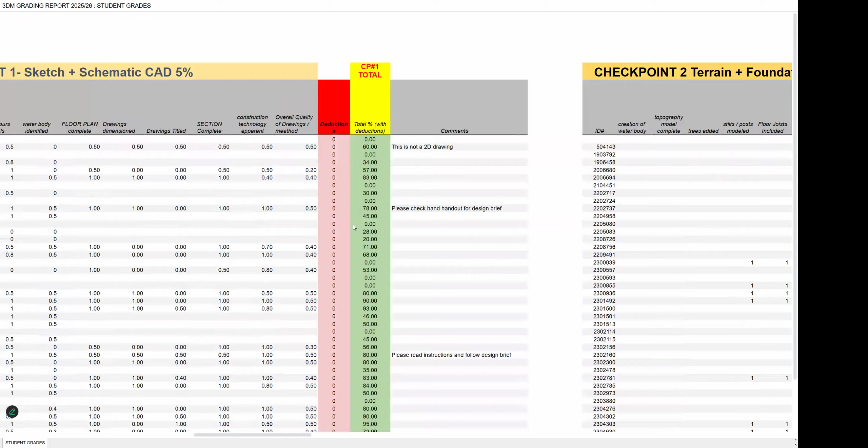By the way, don't forget, guys, that you can at any time go ahead and check your grades. 3D modeling. Right, you just go to the check grades section on the website and you just scroll over until you reach the different checkpoints. Please pay attention. Sometimes I leave some comments for the different checkpoints. If I don't leave a comment, it doesn't mean that your work is not good. But usually I leave a comment, especially when there's an error with your drawing, or you need to resubmit or something like that.

Sometimes I will leave specific comments. Second here. Right. So please don't forget to check your comments whenever you check your grades, right? So let me see what the latest is here.

Excuse me, good morning, sir. Yeah, man, morning. Did you get to check on my name? My ID number was missing. You still seeing it missing? Yes, sir. Okay. All right. Let me see here. There was a couple. Yeah. So it was fixed. So let's give it a little while and it should come on, because when I check it here, let's see. No. Hold on a second.

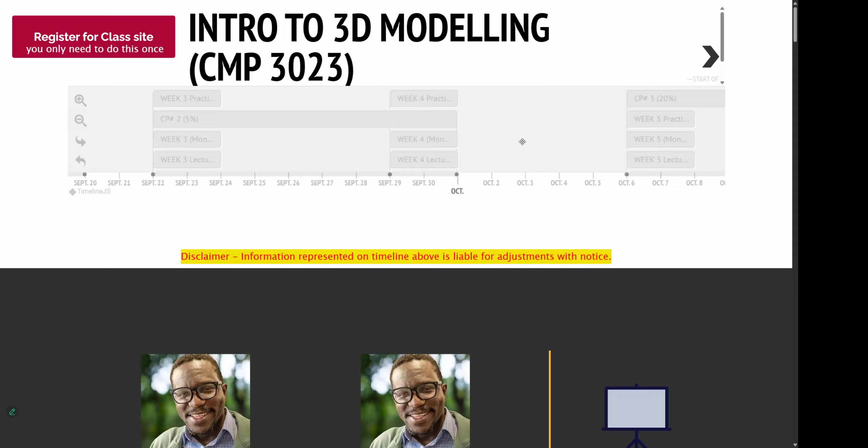All right, guys. So what we're going to do today is... you should have your foundations in Revit, at least for those of you that submitted. I see some other person submitted after I marked. That's fine. You do have up until Wednesday to finish submitting all of checkpoint 2, right? So this should update in a bit. Right, so you do have until Wednesday to submit for checkpoint 2, which is going to be October 1st.

So just to keep track of where we are, so far, you guys submitted checkpoint 1, which was the designing of your lookout tower. We started in Sketch, and then you did a line drawing that had more dimensions. And then last week, we built the foundation, right? So now we need to put the foundation on the terrain, right?

Before we do that, what I want us to do is a little class activity for today, right? As you know the deal, class activity is going to pop up randomly throughout the module. If you participate in the class activity, then you get the points. I did promise you guys double points last week, right? If you submitted the terrain on the same day, you get points towards your class activity. Did I do that? I think I did. All right, guys?

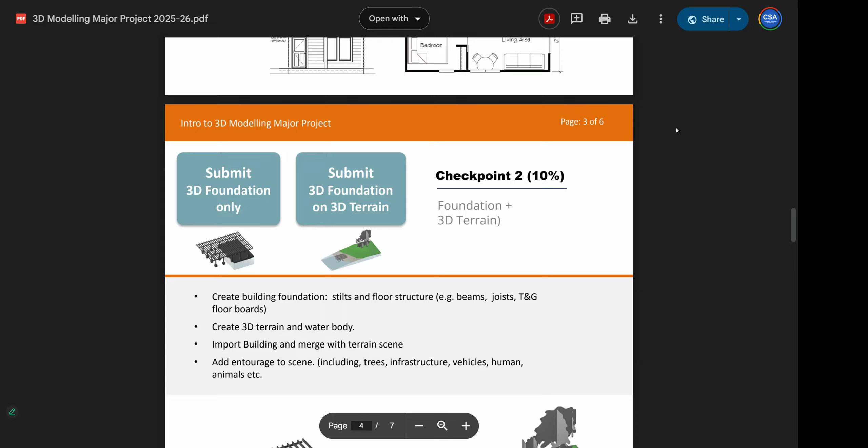Yes, sir. Okay, good. So for those of you that submitted the terrain in class, on the day last week, you will get points towards your class activity. You can check your class activity progress on the website. You scroll down, use the class activity. So activity 2 is going to be the terrain, and you will see that updating a little bit. Activity 3 is what we're going to do today, and it's kind of cool.

So what we're going to do is make an object to put on our deck, right? I'm going to open where I am in the model. So remember the deal, guys. As long as you are traveling with me, you should be fine, right? When I say traveling with me, meaning if you are where I am in the model, then you should be fine in terms of completing the major project, all right? And where I am is working on the foundation.

All right, here we go. So from here, let's go to libraries. Hold on, I'm just looking for my files. Come on, computer, faster, faster, faster. Okay.

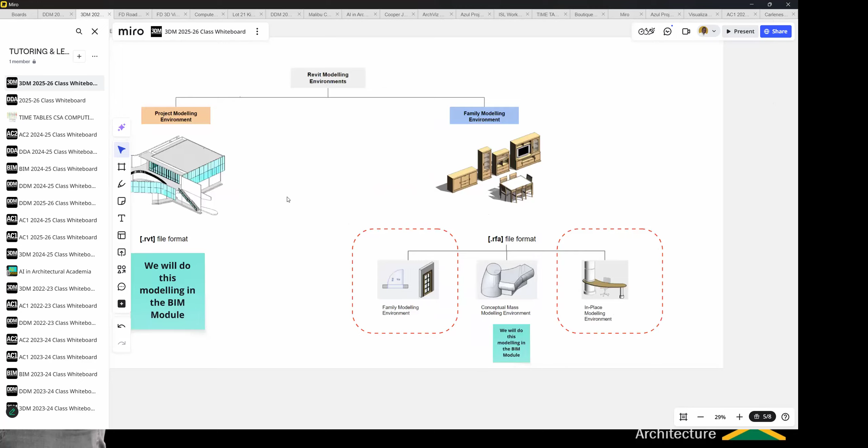Revit has two modeling environments, right? So when you open Revit afresh, so for example, this is Revit here now, and let me close these other projects here. Right, when you open Revit, it looks like this, where you can see all your work that you worked on, and then you see down here, you notice this family section, right? So the way that Revit imports objects into your project is through the family editor, right?

So in the family modeling environment, that file is called a RFA file. Has anybody ever come into contact with this file before? I think we know RVT. Anybody? Yes, RFA? Right, because you probably go on the internet and you download a lot of models. So for example, there's a ton of websites out there.

Here. So, and we're gonna actually visit one of these sites maybe a little later. For example, this one that has Revit content. This one is called BIMsmith. It has different categories. So for example, you can look at doors, and then it has all of these door families here that you can download. It has furnitures and all sorts of stuff. We're going to look at that a little later, but what if you want to make your own object? So that is what we're going to look at today in our class activity.

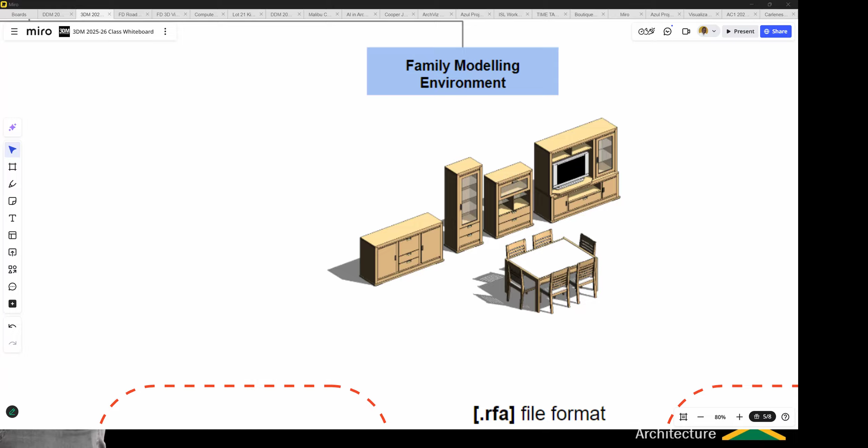Now, we're not going to build something overly complex. We're going to just investigate the family editor just so you guys understand how it works, and we're going to put an object in our model. So I want you guys to just follow along, right? It's really simple, and we're not going to dive too deep in the family editor. We're just going to kind of swim on the surface a little.

All right. So the family editor, when you're in Revit's family modeling environment, it takes on 3 modes. You have one that's called in-place modeling. You have one that's called conceptual mass. And then we have one that's called the family modeling environment. So these are the 3 ways that you can insert objects into your Revit model.

Now, the conceptual mass, we're going to use that next semester when we're doing BIM. We're going to use the family modeling environment today. The in-place modeling, we might touch that in another class activity. We'll see how that goes. But the family modeling environment, guys, is super important for you to at least have an idea of how it works. So I want you guys to just fire up Revit.

And what we're going to do is we're going to create this very simple bench. I've placed it all the way over here. And oops, let me just drag it over here. So this is on the Miro board. If you jump on the Miro board, you can get it real quickly.

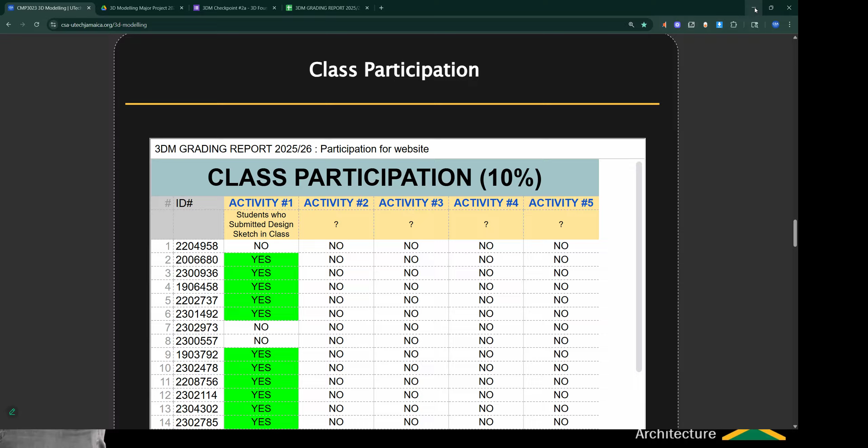There we go. I'm going to minimize you. There we go. Come on. Here. Okay, Revit, where did you go? Where did you go? There. Okay. There we go. All right.

So when you get to your title screen here, normally when you open Revit, you would go to new project, which is what we did last time. But this time you're going to go to new family. So under families, you click new. Then you're going to get this window, and this is an important window. What it's asking you is, what type of family do you want to create?

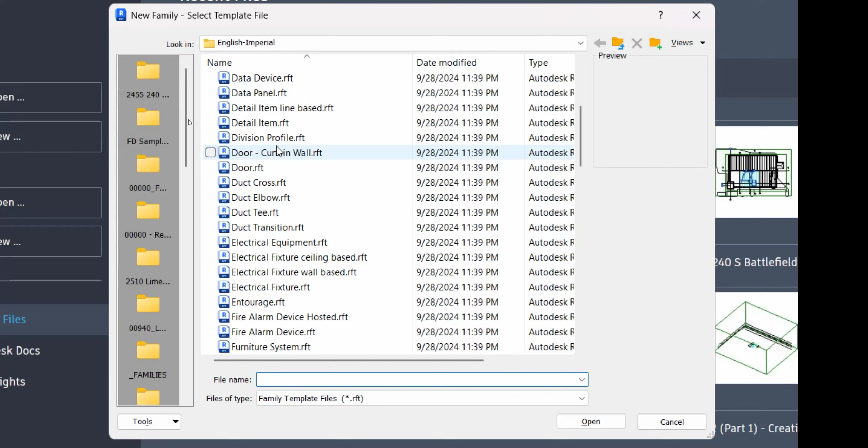Remember, families are the way Revit imports objects into your project. This time around, we're creating a family from scratch, which is different than when we download it from Revit City or wherever. So when you choose new family template, you get these options, the different types of family you can create in Revit, everything from door to fire alarm. Of course, we're looking for the furniture template, and we choose open. All right, so this is what it looks like.

When you open the family editor for any one of those templates, it's going to look something like this, and you will see these crosshairs in the middle of your screen. When you click on the crosshair, you will notice a little pin here, which means it is pinned so you don't move them. This crosshair represents the center of your scene. We're going to leave that intact.

Now, where are you? Here we go. So our idea is that we want to make this bench, and because it is a type of furniture, that's why we're in the furniture category. You might be wondering, okay, but what if I wanted to create furniture and I create it in a door category?

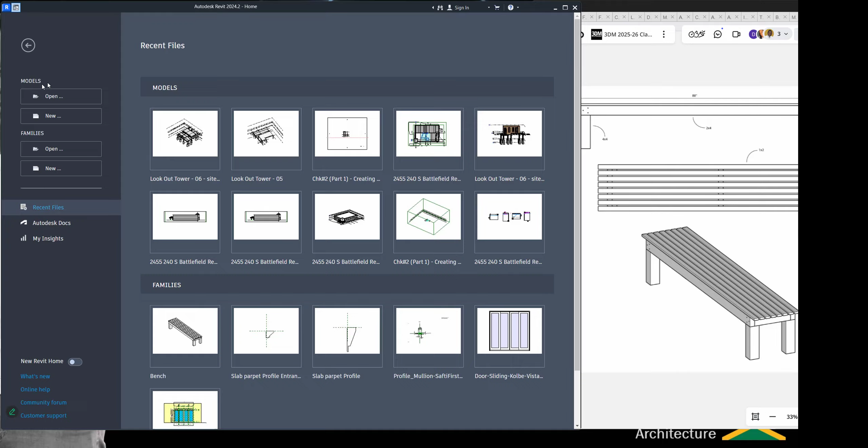So we're to open a new file? No. Well, okay. What I did so far is that I went to families and I chose new. Oh, families. Oh, right. So it's not a project, right? So you see models and you see families. All along we've been creating a BIM model. That is what we're working in to create our tower project, right? But this time around, we're going to be creating a new family. So when you go new family, you have to choose a template.

Right. So this is my project and how far I've reached in my project. Notice when you're in the project part of Revit, up here it has architecture, structure, steel, all of this stuff. This is what it looks like in the project environment. However, when you're in a family environment, notice that it's different. You see create, insert, annotate, like you get this new tab called create. So as I said, it's almost like you're using a different program per se.

So one of the first things we're going to do is establish just the boundaries for the object we created. And usually that's where you start first whenever you're modeling anything in Revit from scratch, right? So I can see that this bench is 88 inches long and 20 inches wide. And in your family editor, one of the most important tools that you're going to be using is called a reference plane. Now, there are reference planes in the project part of Revit, but we don't use it that much.

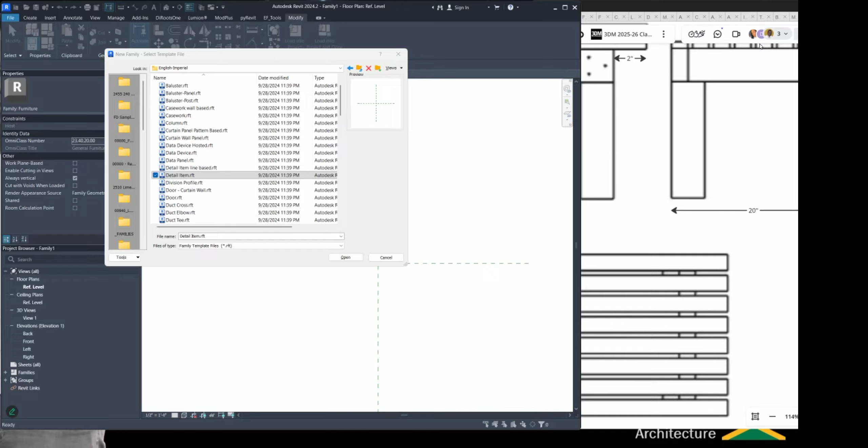Got you. It's like Kristen said, she could model this bench in 5 minutes in SketchUp. But when you import the SketchUp into Revit, Revit can't identify this thing that you imported. It doesn't have a category, and because it doesn't have a category, it doesn't have a way that it can apply line weight and shades and overrides and all the features that Revit has. It wouldn't be able to apply it to this bench that you import from a different software. This is one of the reasons why we would create the object in Revit itself.

All right, so the first thing we're going to do when we open Revit is just to kind of create an outline of where the bench will be in plan, right? So we're going to go to Create. Before we start to extrude or model anything, we just want to have some guidelines, some reference lines. Hence the term reference plane, right? So make sure you use reference plane or reference line, don't get them mixed up, right?

All right, so I'm going to use reference line, and I'm just going to draw a line randomly, draw one randomly like this. I'm not putting any measurements to it. I'm just drawing 4 lines like this. And from a top view, this would represent where my bench is going to go. Now, in Revit, whenever you're creating stuff, you want to just draw the rough thing first, and then you modify it to what you want, rather than trying to draw it exact.

So notice that the idea is that if I look at my bench in a top view, it would land somewhere like this, and see the pieces of wood there on top. So these reference planes are just representing the boundaries of that bench. Now, obviously, I need to change the dimension of them. So what I'll do now is I'll click on one of the reference lines, and I know already that the bench is 20 inches wide. So I can just drag this till this says 20 inches.

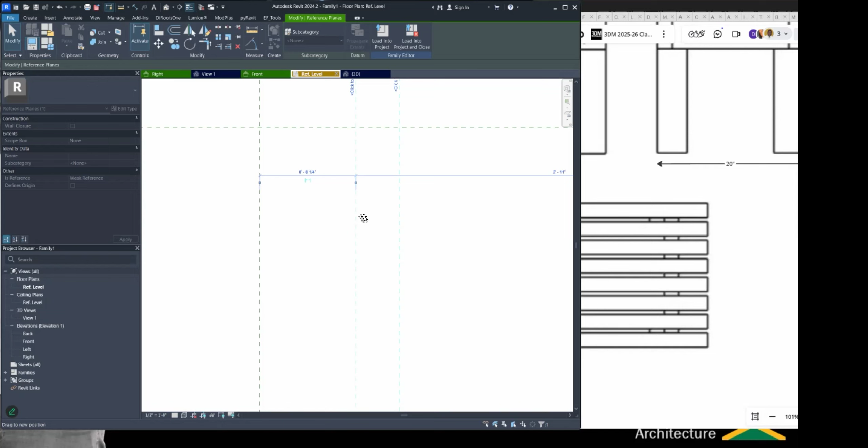Or I could just click in there and type 20 inches. There we go. So that's 20 inches. Actually, it wasn't far off. The length of the bench is supposed to be 88 inches. So I'm going to just click in here and go 88 inches. Now, notice how this works. If I have this line selected and then I change the dimension, then this line will move. If I have this line selected and change a dimension, then this line will move. That's just the way Revit works.

So I'm just going to extend these lines down. All right. And those lines we find where? What we just drew? These are under Create. They're called reference lines. Reference line, okay. All right. So this represents the outer parts of our bench.

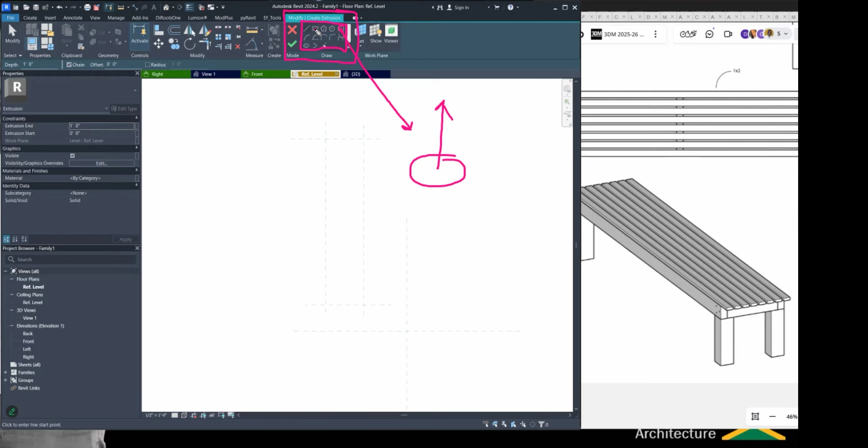So these shapes are basically saying, remember you're inside the sketching tool set, that if I use a circle and I draw a circle, then it's going to extrude it upwards. If I use a square and I draw a square, it's going to extrude it upwards, and so forth. So all of these sketch tools are asking you to draw the profile of what you want to extrude.

All right. So what we're going to do is we're going to go to the rectangle tool, and we know from our diagram here that this is a 4x4, 4" by 4". So I'm going to start at this corner and I'm going to draw a 4x4 box. Now I can actually just change this until it reaches 4 on this side and 4 on that side, right?

Or sorry, what is the width of the bench again? The width, remember it is on the Miro board, okay? But just so you know, it's 20 inches. Okay. So this is 4" by 4", and I'm going to click once. So this is my sketch. Now notice that I'm still in sketch mode, and you see this big X and this tick here. So Revit is asking, do you want to confirm this or do you want to cancel it?

Now, if you look on this side over here, these are the options when you are in extrude mode. It's asking you how high you want this to extrude. The default is 1 foot. Now, you can see that here is the height that we want, which is 18. And then this is a 2x4, right? So we're going to take the 4 from the 18. So we know that this should go up 14 inches. That is how much our extrusion should be.

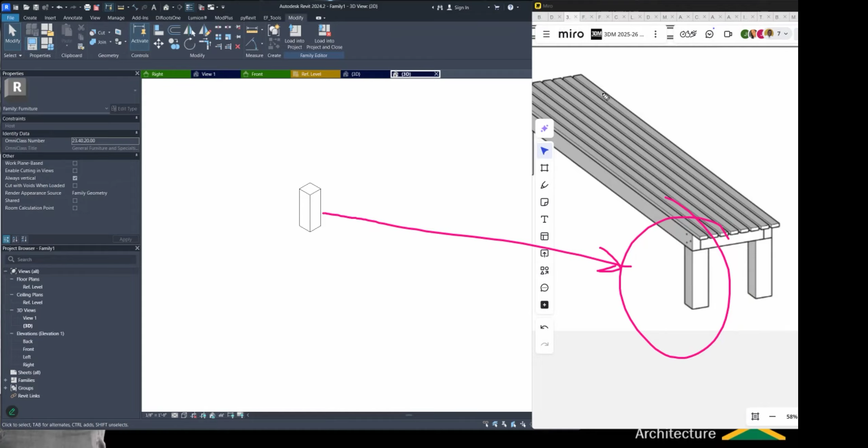All right, now notice when you're in 3D view, you don't get the reference lines, right? And what I want us to do is put the plan view side by side. The way you do this, you just drag this out. Let's put it on this side. Hopefully we have enough space for that.

So on the left hand side here, I have a 3D view, and on the right hand side, I have my plan view. If I click on this object in plan view, notice that you see it in 3D view, so you're able to keep track of what you're doing. So I want you guys to try and arrange your window this way, with the plan here and the 3D view here. As I said, notice that you don't see your reference planes in 3D; they're there only in 2D.

All right, so all I need to do now is copy these a few times. We all know this already because we've used the copy command. The shortcut is CO, right? And we're going to copy it here.

And we're going to select these two guys and we're going to copy it up here. All right. Sir, what did you do to get the box again? It's under create. So I go to create and I use the extrude tool. Okay. All right. Okay, thank you.

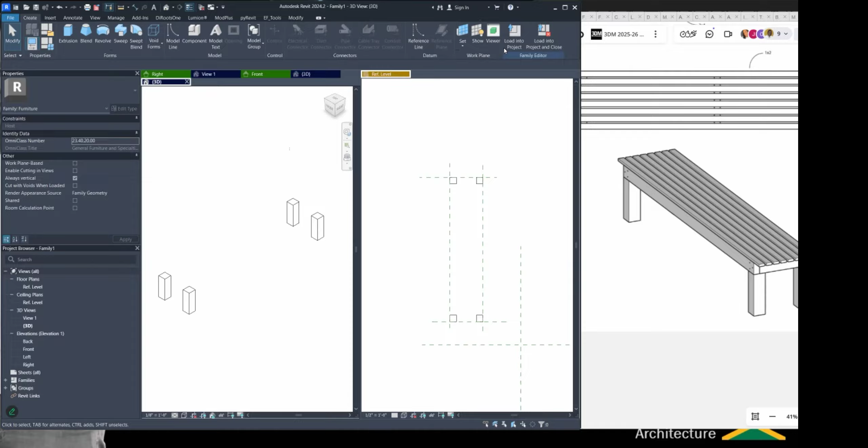So for example, to access your work plane, it's on the right here. If you're under the create menu, it's right here where it says work plane. So if I say show my work plane, notice you see this blue line here. So what this is saying is that anything I draw is based on this work plane. So for example, if I go to my extrude and I choose to draw a circle, the circle is going to be on this work plane, which means that it's going to extrude up. So if I wanted something to extrude this way, I would have to change my work plane like this.

So by default, Revit has work planes that are working in the background. I'm going to cancel that extrude. And usually it's off by default, but you can show it. So the idea is that I would want to draw a shape like that and extrude it that way. Right, and I would want to extrude it that way. But in order to do that, my work plane has to be like this.

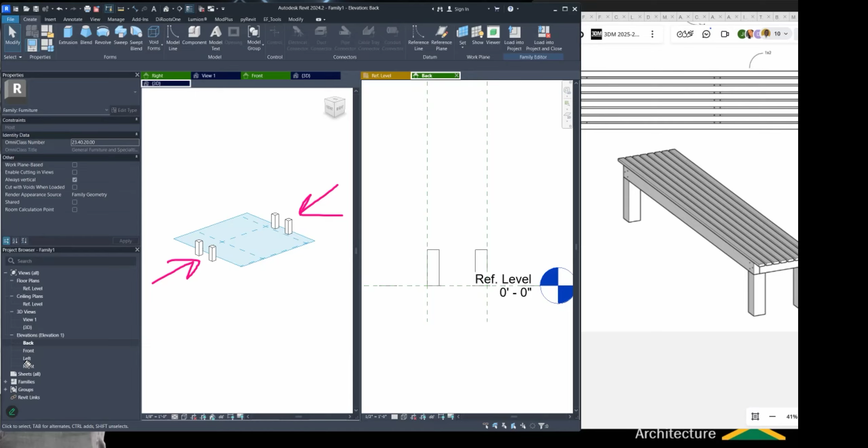All right, so if I go to a front view, notice it looks the same way. And if I go to a left or a right view, notice that it looks that way. Now, I'm going to go to my 3D view on this side. Oops, no, that's the wrong project. 3D view on this side. Right. So what you notice is that when I go to my side view, I'm seeing those reference planes. So let me go to top view and side view, because this point is important.

All right, guys. So notice these 4 reference planes that I have here. 1, 2, 3, 4. And from a plan view, I can see them. From a front view, I can see them because this reference plane here is this line here. Is it? Let me make sure. No, it's actually the other one. Right. So this reference plane is this line here.

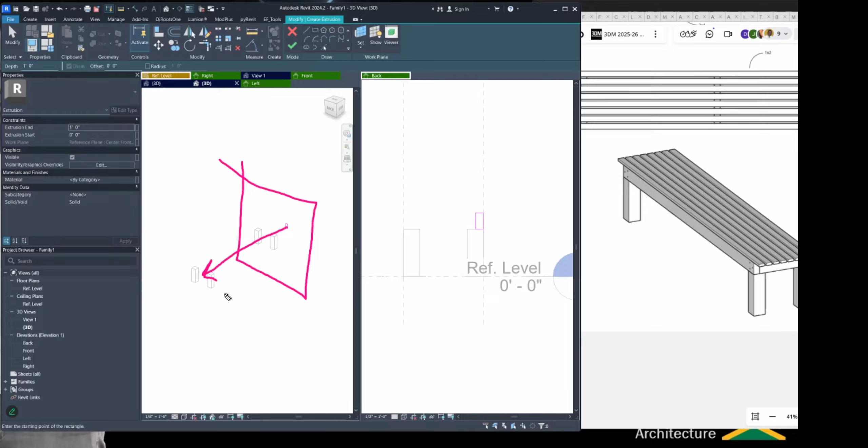Now, the reason, remember, if I'm in a back view that's here, let me go to my 3D view. Notice that because I'm drawing this in my back view, automatically that has created a working plane for me like this. So when I extrude, I will go this way. But if I tried to create this from a plan view, it would have gone up. So that means you need to change your view in order to have your work plane adjusted to determine where you're going to extrude from.

All right, cool. So again, it's going to ask me what is my extrusion length. It says 1 foot by default. This time I know that it's going to be maybe less than 88 inches, but I'm not going to worry about that length yet. I'm just going to tick yes. And the reason for that is that I can adjust these easily in the 3D view, right? I don't have to go into the extrude tool to extrude. I can just grab these handles and change it, which is very handy.

So before I place this member here, I'm going to go back to my plan view, right? So my reference level. And I actually need to make an edit here because even though this is 88 inches, the legs actually come in 2 inches. So what I'm going to do is I'm going to move this. Now, I'm going to create another reference line. So I'm going to copy this, CO, and I'm going to copy this 2 inches. And I'm going to copy this 2 inches.

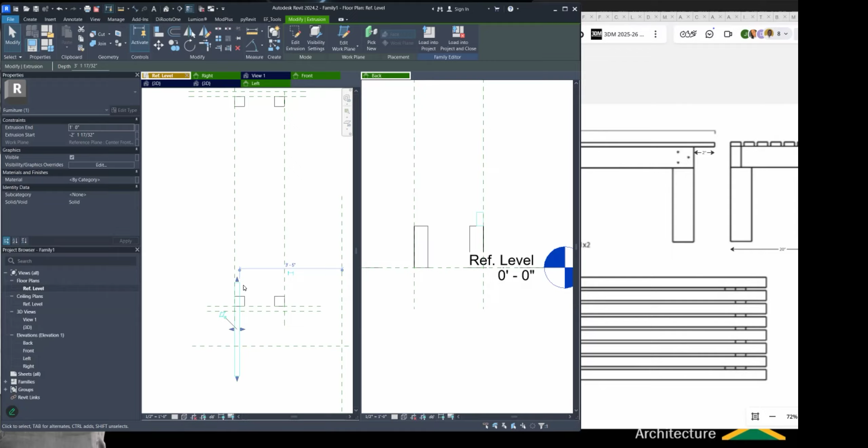I'm going to use the trim extend tool, because that's like the greatest tool ever. So you just click on that, click where you want the thing to extend to, and then click the place that you want to extend. Oh, hold on, do this right again. How is it the other way? I can't do it from this view. Oh, I can't do it from plan. Okay, well that's fine. Just extend it that way and extend it this way.

Oh, sorry, not trim extend, align. I want to use the align tool, which is this one here. Shortcut is AL. Right. So I just click where I want to align it from. And then I click the face that I want to align. Do the same thing here and click this face. So that way I don't have to be dragging. So the align tool is pretty cool with that. It's not the trim and extend. Even though the trim and extend does a similar thing, trim and extend would only work with a line or wall. It wouldn't work with an extrude.

All right, so I have this first point here. So if I look at this in 3D, this is what it looks like. So all I need to do now is I just need to copy this on this side. So I can actually do this in 3D view. I can go CO, copy. No, let's do it from elevation view. Copy from here to there.

All right, cool. Now next I need to get the member that goes across like this. Actually, this stops along here, so this should come down to this point. Right, so I'll use the align tool again, which shortcut is AL, and I'll just align those. So I click this face, click that face, click this face, click that face. Right, that is how it should be.

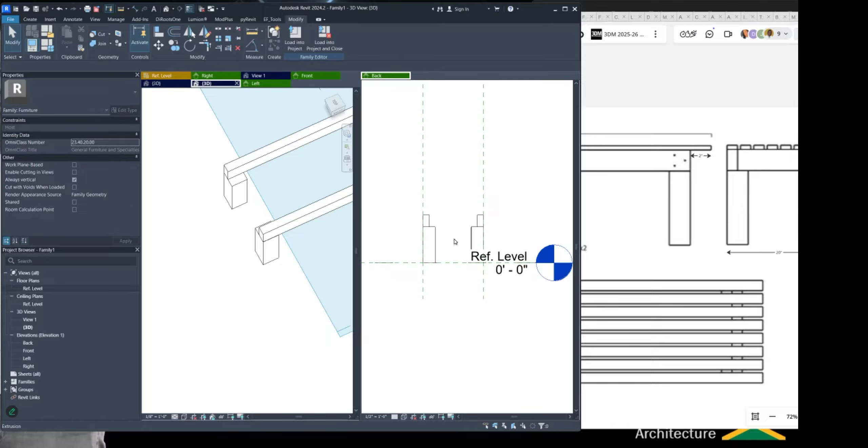So hold on. This is actually slightly off when I zoom in. So yeah, I want to move this here. Right. So guys, check your thing. Make sure that it doesn't have any off dimensions. This one here says off too. I'm going to move it this way.

All right, so you're right, Marvin. I would need to change my view. So what I would do is I would go to maybe a left or right view. So for example, this view here, and I would do the same thing. I would now go to create, and I would go to extrude. And I will just draw another 2x4 here.

Now, when I draw it here, if I go to the 3D view, notice that this is all the way down here. Why is it that I am not drawing right here? I'm drawing all the way down here. Probably that's where the plane is. Exactly, that is right. A lot of people forget about their planes; they're drawing something and wonder why it's there. Because Revit turns it off by default. So if I go to show, notice that this is where my work plane is. It's all the way down here.

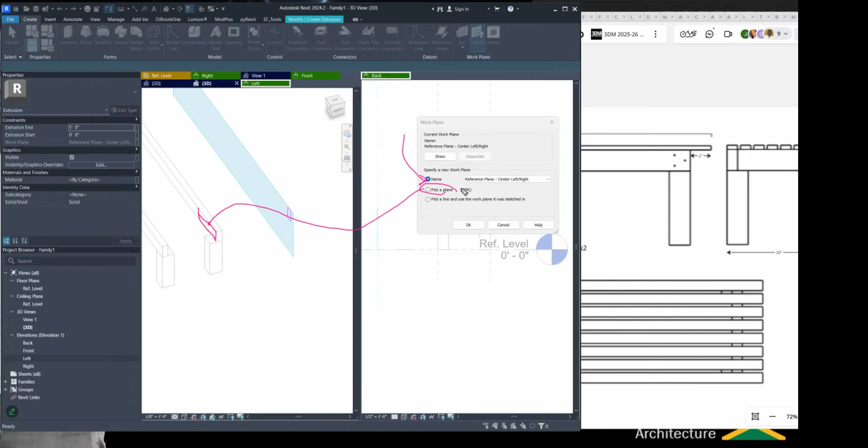So in this case, let's say I pick a plane, choose OK, and I'm going to select. Notice I can choose any one of these planes, but it has to be going in that direction. So I'm going to choose this plane here. Then what you notice, this suddenly comes right here. So don't forget about your work plane. I'm going to choose OK now, and it's just going to make this 1 foot, but that's okay.

I can just extend this down to there. Or, as I would recommend, use the align tool. Here's the icon, or AL is the shortcut. I would select this face and then align it like that. Next I want to copy this, so I can use the top view for that one. And I will just copy this up to here. All right, guys, so this is what we should have so far.

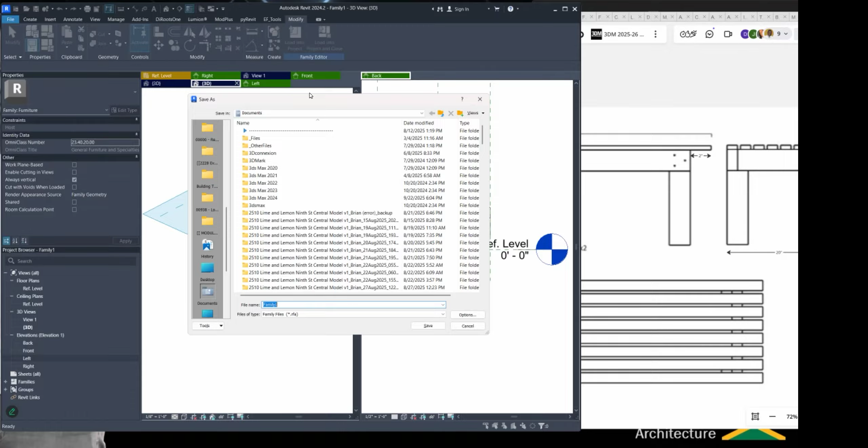It would be a good time to save. If I click save here, it's going to bring up the save dialog box because you cannot overwrite the templates. It's going to ask me where I want to save. I'm going to save it on the desktop and call it bench. Remember, when I save this, it is an RFA file, not an RVT. RVT is a project file. RFA is a family file. Those are two completely different files.

Okay, hold on a second. All right, now for the last part. How do you remove the line weight again? It's this icon up here. Yeah, I can't see. Oh, can you see that one there? Okay, right. Okay, hold on a sec here.

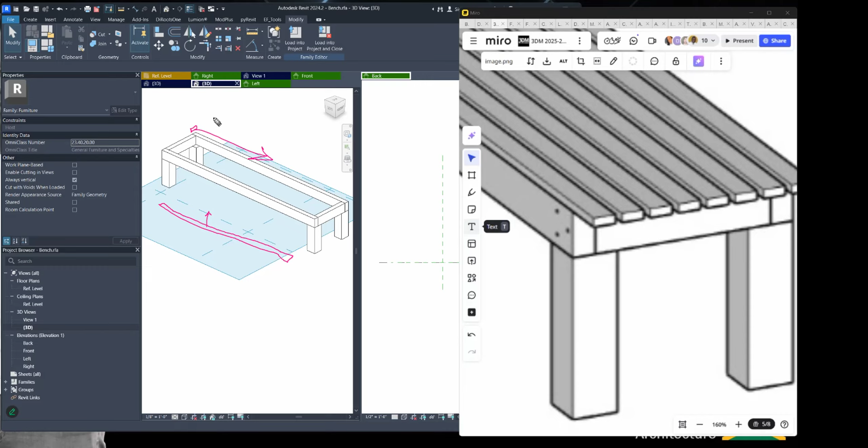So for example, it is likely that when I extrude this way, I can change the length of the extrude. The extrude is going to have a start and an end. So I would choose the long way, but it doesn't mean that this is necessarily wrong, it's just what I plan to do with this after. So remember, when I extrude this way, my work plane is going to always be here. And in Revit, your work plane does not change, right?

So for example, when I extrude this way, anything inside of this extrusion is always basing its work plane here. Because you can modify an extrusion, you know. So let's say that I had this extrusion here, and I want to change this shape from a square, maybe to a T or something like that. Well, I could double click and now I'm back to this shape here, and then I can go in and modify.

I can modify this extrusion. Come on. Like that. And then I choose OK. And then notice that this leg is changed. You guys see that? So each of these extrusions that you made, you can go into them and change them. But remember that because this extrusion was originally built with the work plane below, I can only modify this shape in this direction.

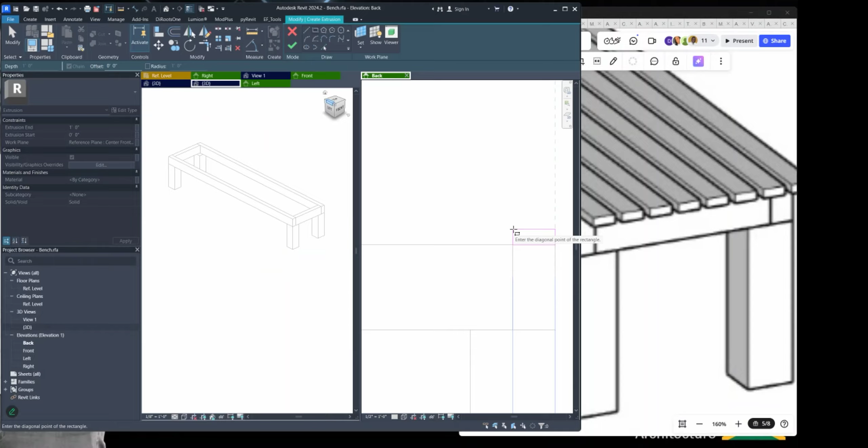Excuse me, sir. Yeah? Could you repeat why you want to do the extrusion, what you were explaining a while ago, why you want to do it a certain way? Because I'm just thinking about the future. Remember, once you create an extrusion with a work plane, anything else you create in that extrusion always has to use that work plane. So I was giving the example that

if I wanted to have this shape, have something that shoots off like this, this requires a work plane going that way. But this extrusion that I originally made is a work plane going that way. So I can't create this shape in this extrusion. I would have to create a new work plane extrusion going this way, and then a work plane extrusion going that way. So this is why you want to choose the direction that you extrude in.

So let me give you another example. Remember, you can double click and modify an extrusion, I can go here and do another shape in this extrusion, click OK, and I have a totally different shape here. But any shape that I want to create is always going to be based off of the fact that my working plane was on the ground. You get what I'm saying? So you would want to choose where your working plane is based on what you plan to do with that extrusion.

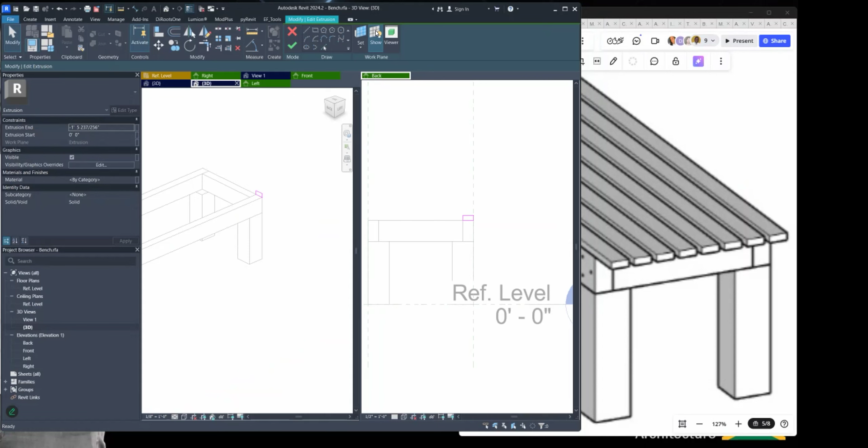Of course, I could move the extrusion if I wanted to afterwards. For example, if I choose OK here, and this is my extrusion, it's going to say my extrusion is going negative because this is 0 and this is negative. But let me edit this again. Let me put the work plane all the way down here. So this is where it was. Let me go show work plane. If my work plane was all the way down here and I choose OK, yes, I can just adjust this. I could say this is here, and adjust this to be here, right? Same result, right?

Same result, even though my work plane for this object is all the way down here. But notice when I click on it, it's not starting at 0. It's starting at negative 1 foot 4 inches, and that is because the work plane is actually way down here. So it is something that can work, but it's usually best practice that if I really wanted to put this thing here, to be neat, I would move the work plane where it's supposed to actually start from.

So let me do a right view. All right, put this over here. So this work plane that I'm looking at now is here, right? This is that work plane there. Ideally, I would want my work plane to be here because I would want to extrude going that way. I could still extrude it from here, but it would just be nicer if it was here, right?

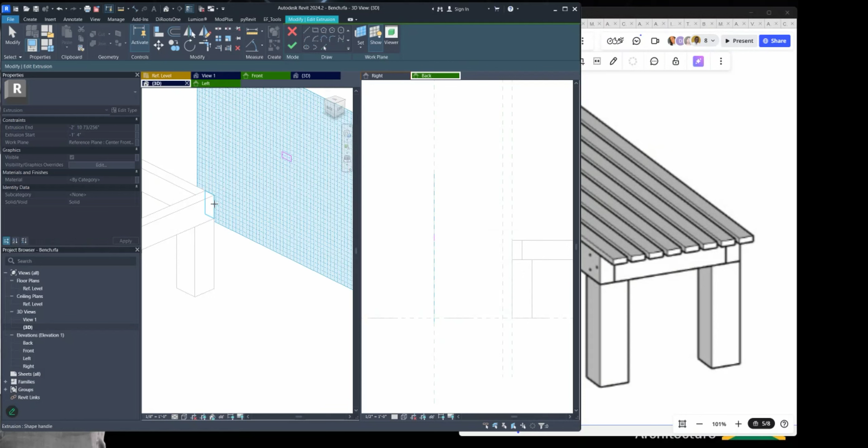Close this. Right. Right. So I can go to set work plane, and let me see, pick a plane, pick a line. Let me choose pick a line. Let me see if this works. No, I can't pick a line this way, because it's not a reference line, it's a reference plane. I could pick a plane. I could just pick this plane and work with that one. Choose OK.

All right. So then now my extrusion, I can just carry it down to there and carry it all the way to there. And then I have my first line like this. So I hope you guys get an idea of what reference planes and work plane is. This is a big part of modeling in the family editor and modeling in Revit on a whole, right?

All right, so now I have a few of these going across, and the last lesson for you guys to learn with this little exercise is that, let me go to my top view here. How am I going to copy these evenly across this space? I know what this space is, and I know what the length of each of these are, but how do I make it even?

Now, in order to do that, what I would do is I would create another reference line, so a reference plane. So remember, try to use reference planes as much as possible. Think of it as like construction lines or guidelines when you're drawing. So I would use a reference plane, and I would put that reference plane in the center of my piece of wood here.

There are 1, 2, 3, 4, 5, 6, 7, 8 planks here. So I'm just going to copy this 8 times. 1, 2, 3. It doesn't matter the distances. 4. Notice some of them are even inside each other. 6, 7, 8. So notice how I just draw them randomly, right? If you look in the 3D view, they're not evenly spaced, but I have the right number. 1, 2, 3, 4, 5, 6, 7, 8. Actually, I have 9. Right. 4 and 4. Good. 4 and 4.

All right. Now, all I need to do is make sure that from a plan view, the last one needs to be in the correct location. So I need to have the first one and the last one. And then what I'm going to do is I'm going to use the dimension tool that you see up top. That's the dimension tool here.

And I'm going to draw a continuing dimension between all of these reference points. So I click one time, click again, keep clicking, underline every time. So what I'm doing is getting the distances between each one of these. And when I'm at the last one, I'm just going to click on the outside ones. So let me change my scale a little bit so you can see them.

So notice I have all of these distances. And notice that they're not equal. They're all different. Let me make the scale a little smaller. Yeah, they're all different. And then what I'm going to do is click on that dimension line I just created. And I'm going to click this little button here that says EQ. And once you do that, Revit will automatically make all of them equal.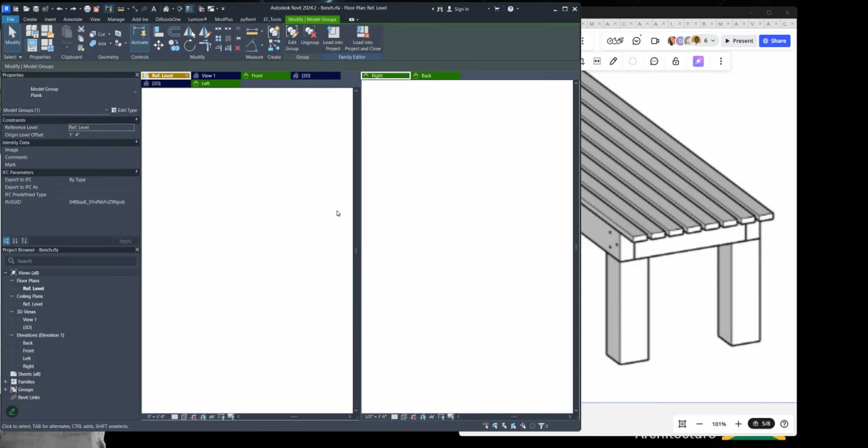And you chose group, not... No, well, they only have group. Okay, all right. Ungroup it and group it again. And I'm not sure if there's an option there that you click. So when you click on this, you get the option to select elements, edit group, ungroup. You get these options here. Yes, sir. So choose ungroup. And right, you are in a plan view. When you ungroup it, of course, they're going to move as separate elements, right?

Should I select the plank first or the reference line? No, it doesn't matter. You just select both of them and choose group. And it asks you if you want to name the group, and you choose OK. And now you see the dotted line around it. So now once you move one, both will move. Are you sure you use reference plane and not reference line? You use reference plane? Yeah, the reference plane is dotted, right? Sorry, yeah, correct. And it's still doing the same thing.

All right. Here's what I'm going to do. I will check that at the end of the class because I'm not sure about anybody else. So, are you getting that? What version of Revit are you using? I think it's 2024. 2025, sir. I mean, that shouldn't matter. It should be the same thing. Yeah. 1, 2, 3, 4, 5, 6, 7, 8.

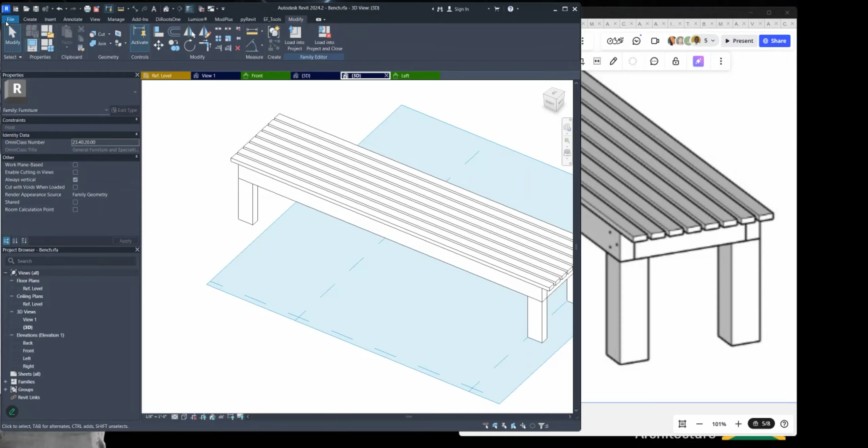So I'm going to close this window. So in order to do that, up here where you see these two icons, well, firstly, you need to open your foundation that you created last week. So I opened mine. Here it is. You should have the foundation also open. All right. So I'm going to go back to my reference model here. And then what you're going to do is choose load into project. That's this icon that you see right here.

And when you choose load into project, it's actually going to ask you to place it now. So I'm going to place mine right there. And that's it. I now have my bench. I seem to have messed up something here. Yeah, I did. It's because of when I was showing the examples here. So let me go back to my 3D view here. Right. This is supposed to be 2x4. Yeah, I changed it when I was demonstrating stuff to you. I think it's supposed to be out this way by 4, which is okay.

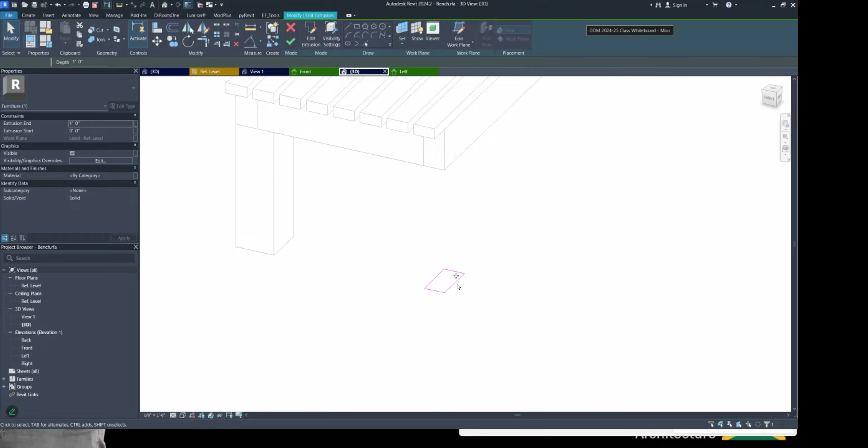And oh no, it's supposed to be in here, right? Let me go to my plan view and I'm going to move this in and move this in. Yeah, change this. All right, there we go. So I'm going to choose load into project again. And it's going to ask me, do I want to overwrite? So I'm going to say yes, overwrite the existing version and its parameters. And then it's just going to replace it.

Oh, I need to change that part right there. Crap. Oh, because I moved that. Okay. Move this over by 2 inches. Oh, I see now. Okay. It's this guy here. It needs to come like that. Okay. Load into project, and I'm going to replace it again. There you go.

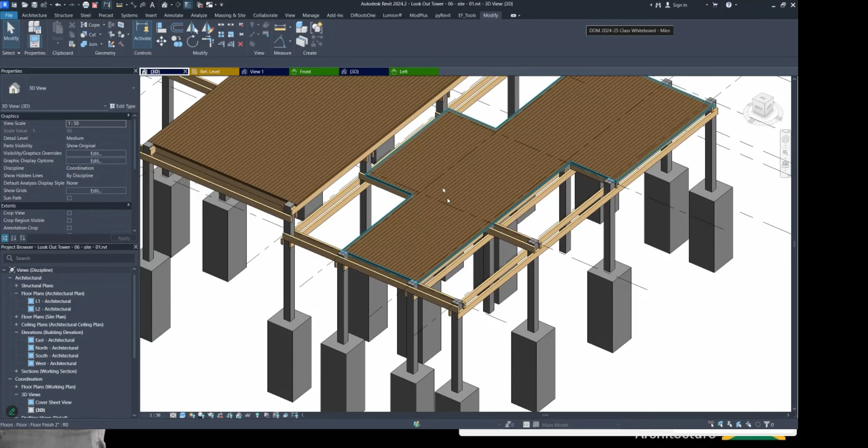Sir, it's not loading into mine. I have both open and it's not loading. Oh, all right, look, let me delete it here. Let me go back here. When you go to load into project, if you don't see it, it is actually there in your project. Just go to architecture and go to component, and you will see it. You should see it as a component for you to add. Here it is, bench. Do you see it? Component. Okay, 1 second.

Hello, family. But what can I? One second. No, hold on. Remember, when you load it into your project, it is now in. Usually you get the option to place it at the same time, but even if you don't get the option to position it, it's actually loaded in the project. It's in your library of families for this project.

And how you access that is that you go to Component and you will see it there. Sorry, but still I'm doing that and it's not loading. I don't know. So when you go to Component and in the Properties tab, you don't see like a list of objects and one of them is the bench?

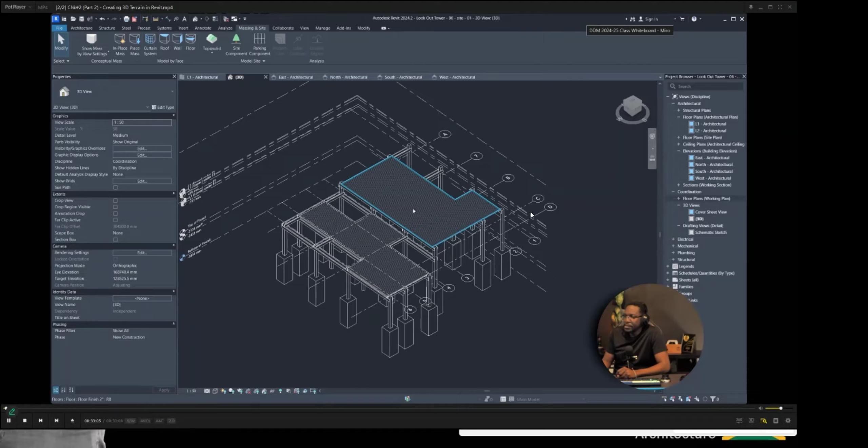All right. Okay, so now that we have the base, now we're going to create the terrain. And if we look, it's terrain time.

Everybody with me? Alina, you stretch yet? Take a break. Okay, I'm here. Take a breather. And we continue.

Don't worry if you don't get the family editor thing. We will do some more of it. But as I'm telling you guys, a lot of people find stuff on the internet, like different families, but it's not quite what you want and you need to modify it. Yeah, that's your secret weapon right there. Knowing how to manipulate the family editing.

All right, Swaby, you ready? Swaby here. Oh no. No, I don't see Swaby. No Swaby. Leonardo, ready? Where's Leo? All right. I don't know if Swaby and Leo are ready, but I know Evelyn is ready. You ready, Evelyn? Yes, sir. All right. Let us proceed.

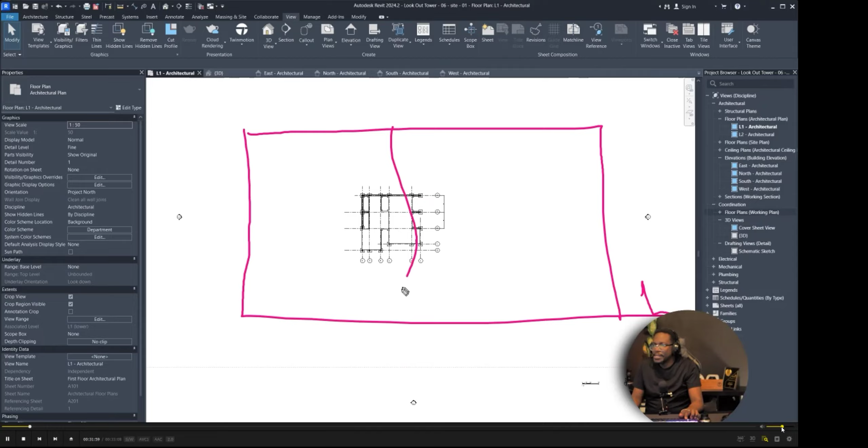The general idea is we have our land, which is something like this, and then we have these terrain lines, and it's basically sloping downwards to the water, and then we have the water that's here. So that's basically what we're going to repeat here. Now the difference is we are going to do it a little bit more efficiently than what we had in the sketch, but we're still going to reference our sketch.

So first thing we need to do, we need to grab the sketch that we had. That's this. So I had saved it out into a file. So now I'm going to go to manage, and then I'm looking for links, right? Manage links. If I look on the images, I see where I have already inserted this link, right? So we did have this link here. And we're going to choose OK.

We can go back to our schematic sketch. Here we had this, and we're going to copy this over to floor plan. We're going to paste it in here. Notice when we paste it, it's pretty big.

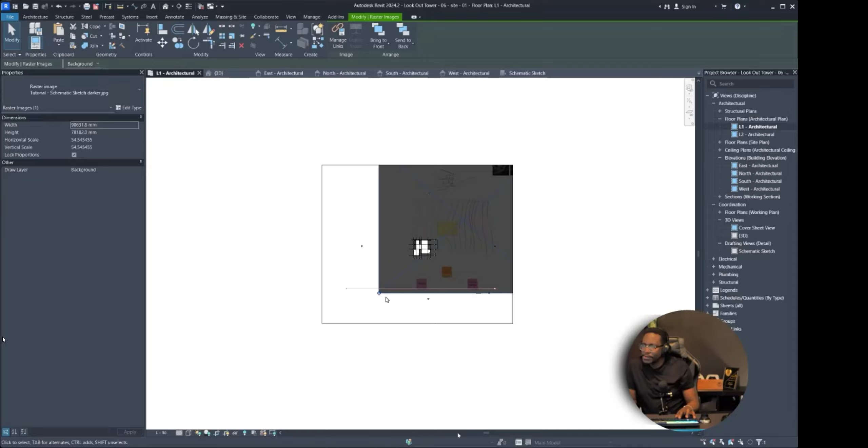We are going to make it a little smaller, and the most important thing is that we need to know what these levels are, and we also need to scale it. So in our case, I don't think this drawing was to scale anyway, so we will take these contours with a grain of salt, so to speak.

So if I put it like here, it's round about there where I had the water kind of going in here, right? Now, if my contours were very specific, I could actually trace this view here. So that's what I'm going to do. So guys, what you realize is that in my model, I've carried in my sketch. Remember that first sketch that you guys...

Mic check. Oh yeah, you heard me. Right. Remember that first sketch that you guys did? Yes, sir. Right. So that is what I did there. Just going to my plan view. And just simply... Yeah, go ahead.

Sir, I have a random request because the file that I used to make my sketches, I can't find it. So I was wondering if you could send me back the file. Send it back to you? Yeah, man, no problem. Yeah, that's Davina. Davina Thompson. All right, cool. I'll send it in the group. So look out for it.

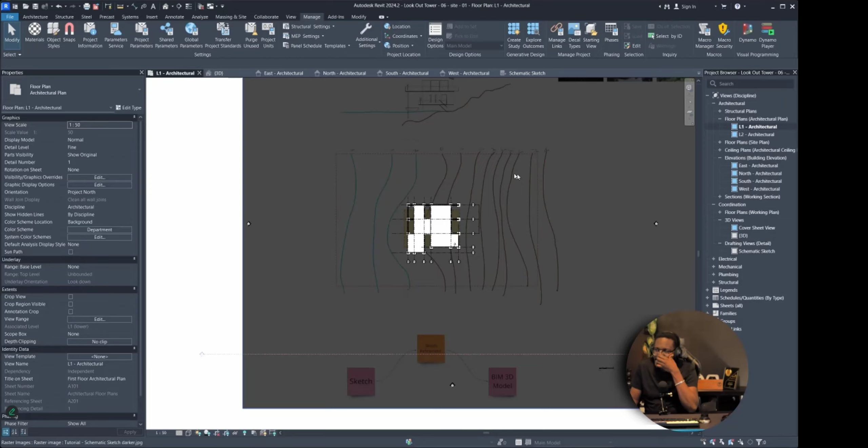All right, now, first thing, we don't want to have a square land because that's going to affect our 3D views, because the world doesn't end right here. So what we're going to have is more of a rounded base, and make it a little bit bigger. That way, when we're doing 3D views, it won't look so weird.

So to do this, we're going to head over to Massing and Site. We're going to go to Topo Solid, and we're going to insert using a circular tool. But before we do that, we're going to go on the right level. Now, according to this, we wanted the land to be at around 0 here. This is a sketch, so it may not have been very practical for some of the elements, but one thing that we want to keep in mind is the slope. We do have the 1 meter slopes that's happening.

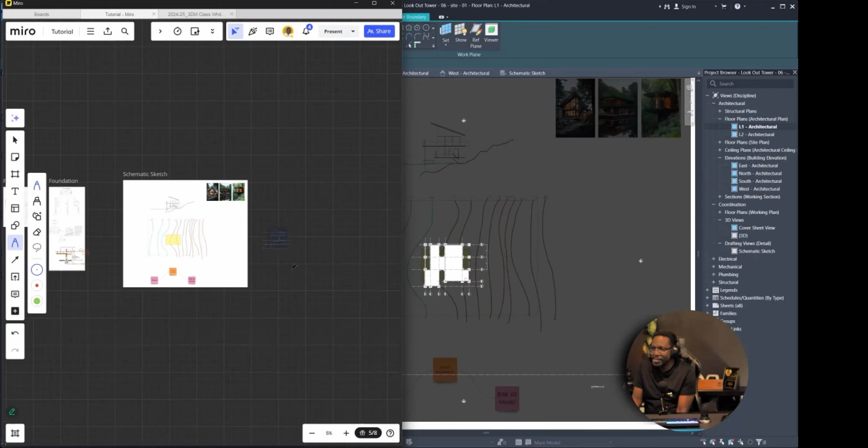So we would set our Topo Solid to be below the ground floor. So perhaps we will do waterline. If you remember from our original sketch, we did determine that we want to have a waterline that is below the top of foundation, right? So we have the waterline level, and we want to draw the initial Topo Solid, which is the topography, on the waterline level.

Now we're using the circle tool because we want to actually draw something like this. And then let's see if we can move it to the center. So now we make it a little bit bigger, and we don't have these hard corners, which would look kind of weird when you render a view and the hill just ends at a weird corner. All right, so now we choose OK, and then we have our base that looks like that.

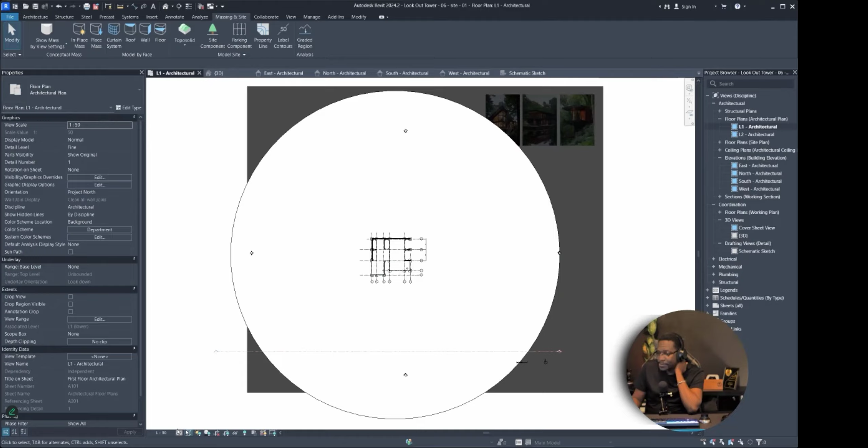Now, what we need to do is insert the contour lines. It's a little tricky because we can't see the contours, but we could go to wireframe, and that will allow us to see these contour lines here. The general idea is that we want to trace these contour lines, but also extend them to the edge of the circle. The more important thing is we want to keep the levels, right? So we click on the topo solid, and then choose Add Points. When we add points, we're simply adding a contour line to our drawing.

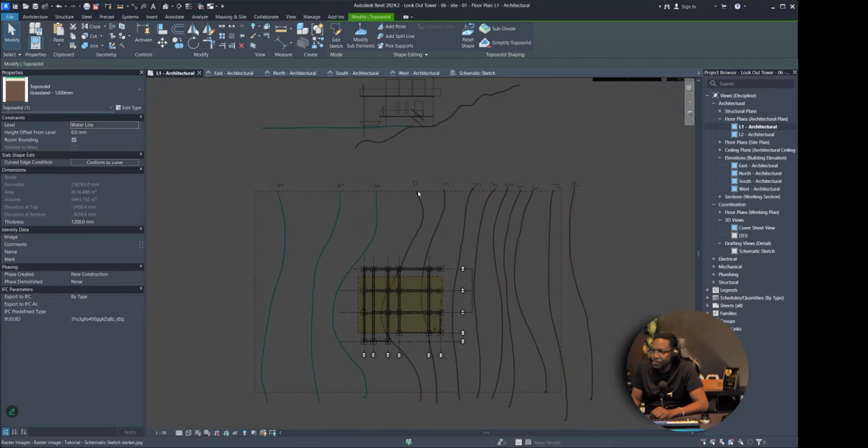So to create these contour lines, what we're going to do is look at these levels closely, and we are going to trace them based on these levels. However, we're going to extend the lines all the way to our boundaries, or circular boundary. So to do that, we're going to go to Massing and Site.

Well, we already have the massing, so we're just going to click on it, and then we're going to choose add points, and these points here are equivalent to the actual height of each contour. We have to make sure that we choose absolute, because we want the points to change height based off of a fixed location, and that fixed location we're going to make the current level.

So the current level, we're at waterline, so it's kind of like saying this is the water level, and every level we do is going to be referencing that water level. So it's going to be above the water level or below the water level, right? So make sure you choose current level here, and choose a different height. The first thing we're going to choose is 1 meter, so 1000 millimeters, and then we're going to trace this off that 1000 millimeter line.

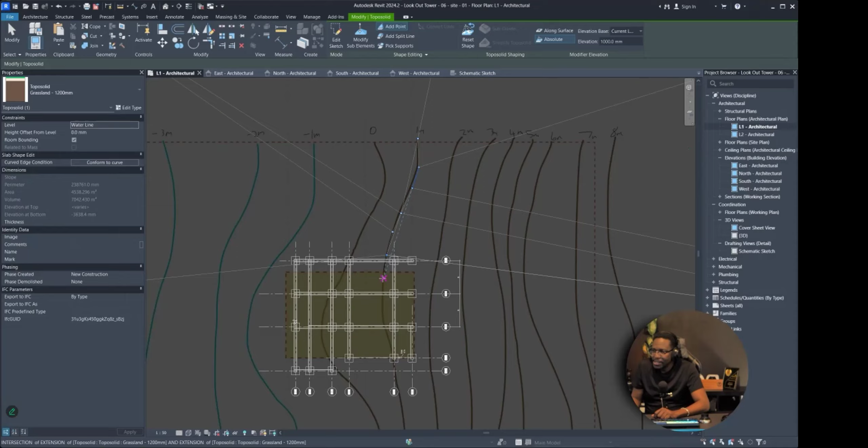Now, as we trace these points here, a good rule of thumb is to try to make them as even as possible. It doesn't have to be super precise. Remember that a terrain is organic, right? So it's supposed to be messy. Now, when it goes beyond where you have sketched, you're just going to make this up. And you're going to go all the way to the edge here.

For some reason, when I click on mine, it just does this radial thing. That's okay. It looks like a blob. Yeah, that's fine, because the reason it's doing that is... right. The reason it's doing that.

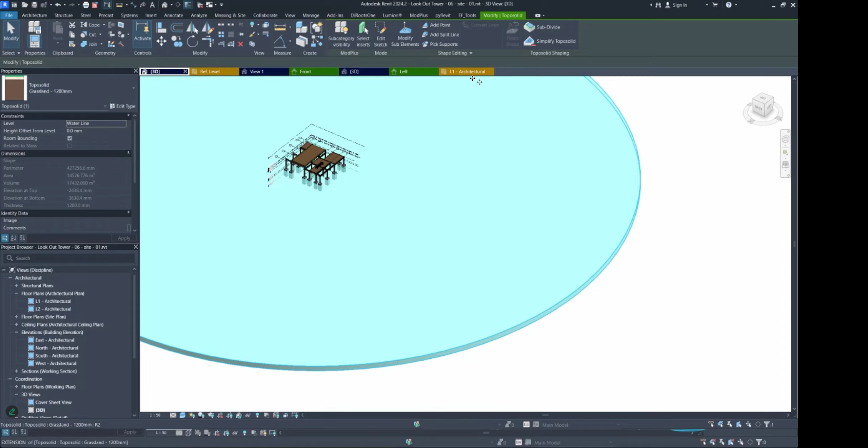Okay. Because the more you draw the lines, the more the terrain will take its form. So let me put this to waterline. That's down here. So like that. Right. So whenever you draw architectural, it's below. This 3D. Come on, Revit. Right. Okay.

Right. So when you choose to add a point, I'm going to choose current level, depending on how far above or below this is. So if I just put a point here, 3000, put 1 point here, this single point that I've placed here, each point is basically sculpting the terrain as you move forward.

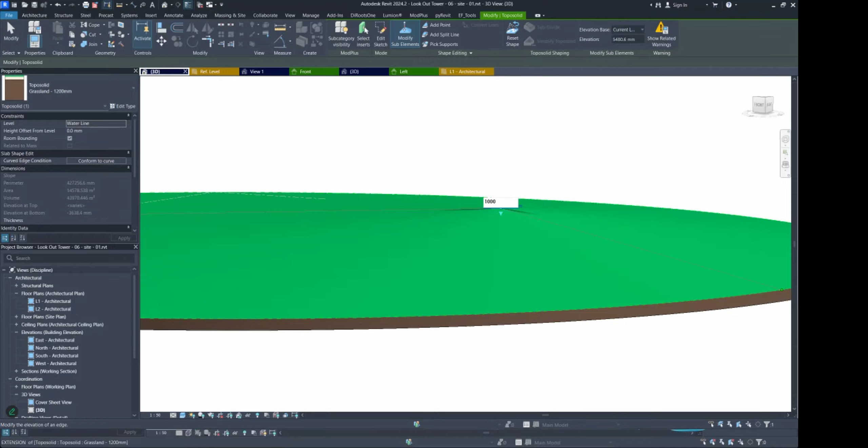So for example, if this point was, oh, that's fine. Can you see it in 3D? Not really, but the more you place the points, let me make this 10,000 just to show you. Right, you guys can see that height, right? So it's going to look weird when you just place a point in the middle, but then as you place more and more points at 10, I'm just showing you an example here. All right, then press escape.

You can see it's going to start outlining that edge. And these circles that you're seeing on yours are simply the contour lines, because Revit is going to automatically grade it back down to the base. So that is why you see these circles when you deselect. All right. You guys with me? Right.

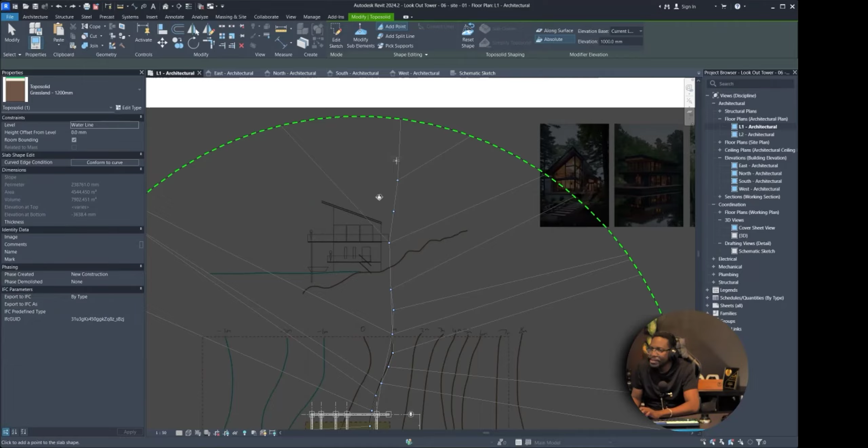And we're going to continue this side. It doesn't matter if you stop here, then continue there. So we are going to continue this. Oops. I think my height wasn't set, so I'm going to set that back to 1000. All right, cool. Now, if you get any messages while you're drawing this, just choose OK and ignore it, because as you notice, you can see these lines.

Sir, why did you set it to 1000? Because my first contour is 1 meter. Oh, okay. Right. Cool. So whatever your contour is, 1 meter is typical, but if you're going up by 2 meters and so forth, you're going to set it to that height.

Sir, so what if, because you set it to the water level, right, you want to leave that as your 0 line, and go down like minus and go up like plus? Could you do it that way as well? Yeah.

So because when you choose absolute and choose your elevation base level, whatever figure you put, plus or minus, is going to be based on that base level. So for me, I choose the waterline level. It's almost like I'm saying 1,000 millimeters above water. That's what I'm saying. But your base level could be anything. You could have chosen your roof level, and if you write 1,000, it's going to be 1,000 higher than whatever you set for your roof level. You understand?

Yes, sir. If I bring up my 3D view, you can see where you're starting to get some heights, which might look a little funny now, but as we go, we'll see the difference. So I'm going to leave this view here, dock it to the right, and we're going to continue drawing this contour. So we're going to choose this and go to add points again. This time we're going to go up to 2000 millimeters, look for that 2000 line, and then do the same.

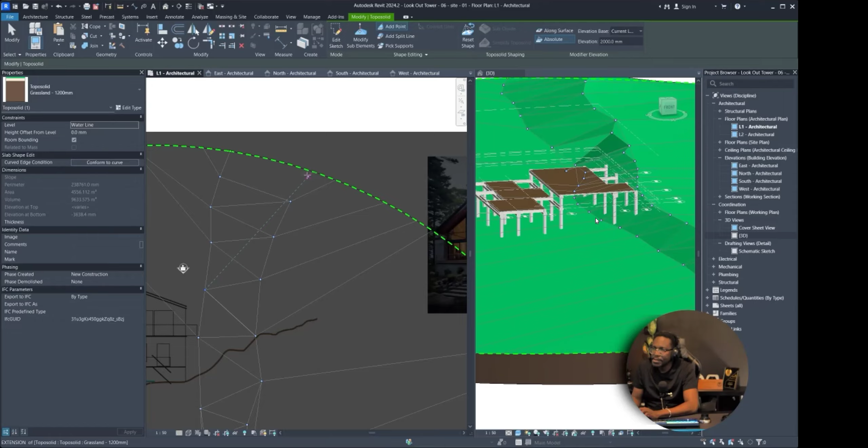And we're going to do the same thing now with 3000. I'm going to go ahead and draw that. As I said, you're not trying to be super precise, you want it to be as organic as possible. All right, and you can see our terrain is coming to life. Let's keep going. So then we got 4000. Oops. If you accidentally edit, just choose OK, select the contour and go back to add point. Always ensure you put in the height, because it's going to default to 0. All right, so 4000.

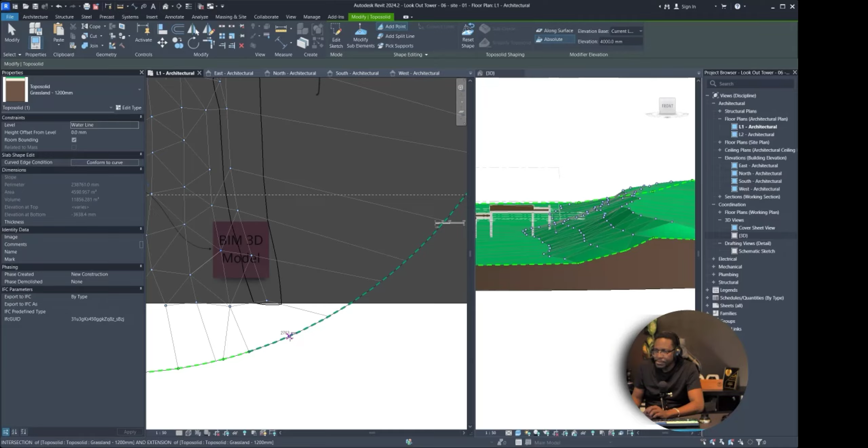Remember, all of these heights are referencing the water line level, right? So that's why we put that level there. And we're going to keep going. 6000.

Now, when you come to the last one, we don't want the landscape going back down, because that's basically what it's going to do, start to go back down here. So we want to make these up. So I'm just going to continue the trend, put this at 9,000. So click it and go to add point.

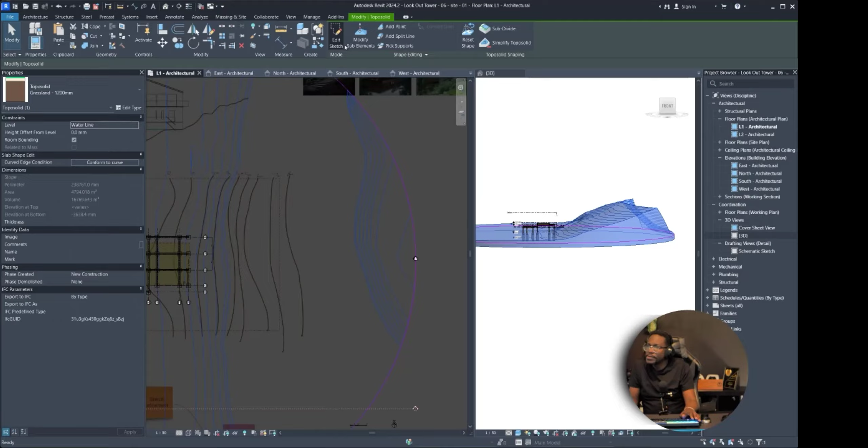Then I'm going to continue. So I'm going to go to add point and 10,000. And I'm just going to do that one here, and another one here. Oops. Yes, this is 10. Oh no, this is 1,000. So I'm going to put 10. There we go. That always catches me.

The trick is that when you type something in any one of these options, once you move the mouse outside it, it's like pressing the enter button. So if you move outside, then press enter, you're going to actually repeat the last command. So just remember that. If you type up here and you move the mouse out, you don't need to press enter. It will press enter for you.

Yeah, I think this point here is lower. I think I undid that last thing I did. So yeah, this should be 9. There we go. All right, so this is our terrain, and we could actually change these points here. So I'm going to put this at 10. Put this one at 10. Maybe this looks a little weird, so I'm going to put these here. Doing mine right now.

Say again? I'm putting in my contours right now, but the higher it goes, it stops showing. Is it because of the level that the terrain is on? You mean it stopped showing in plan? Yeah, it stops showing in plan. Yeah, that's normal. If you look in 3D view, you'll see it. All right, sir. 9. Oh, sorry, no, this is a 10. I need to deselect it because I have them selected. Right, then I go to add point and then put 9. Right.

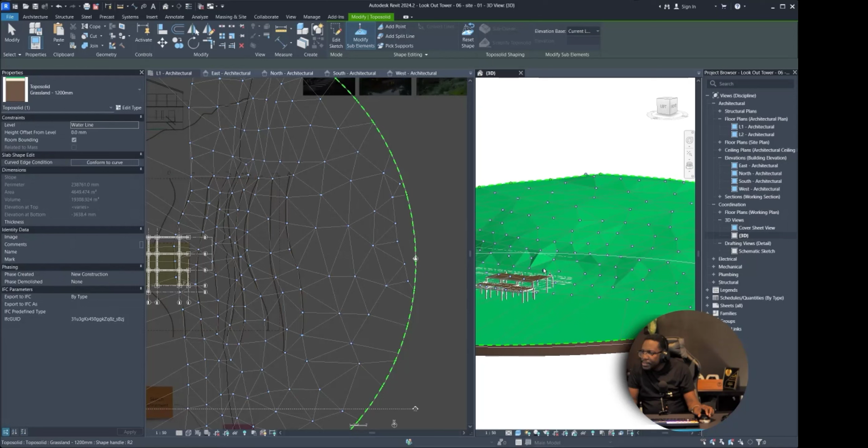Let's go to add point and put 9,500. Actually, I can just select this point. I think there's a point here already. 9,500. And then I can select this point from the 3D view. And this one here looks like it should be at 9,000. All right, let's save. It's a good point to save. So I'm going to save as again.

Now we're going to go below the water. So this was from 1 up. So now we're going to go -1. So we are going to go to add point, and now we're going to go -1. That's great. Now we're going to go -2. Oops. Yeah.

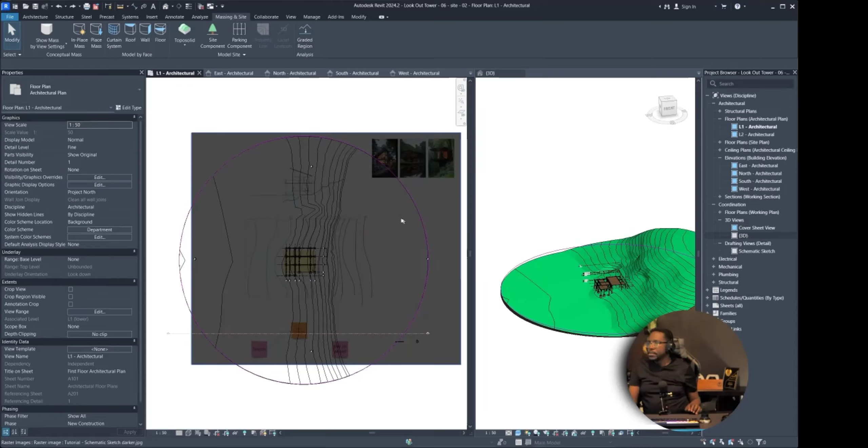Yes. So the reason we're getting that is because we are going below the thickness of the slab. So we need to fix that actually. So the issue we have is that the thickness of our terrain is such that we can't go any lower. But we can fix that if we click on the terrain here and go to edit type, and we see that we can change the structure of the terrain just like how we can change the structure of the floor slab, right? Because technically it is a slab. It's just that it's made out of earth and sand and grass.

So we can let the earth go down by like 5,000 millimeters. So we can make it 5,000 millimeters thick. So now the earth is much thicker. So we can now continue to go downwards within this thickness. So let's go back here and let's see. So we need to be at minus 1. So we're going to go to add point and we're going to say minus 1,000.

Wait, sir, where did you change the scale? In edit type? In edit type. Instructor? Yes. Do you see it? And then which one is it? Oh, Earth? Right, there you go. Change it to 5. Okay. Thank you. 1 already, so it's really minus 2,000.

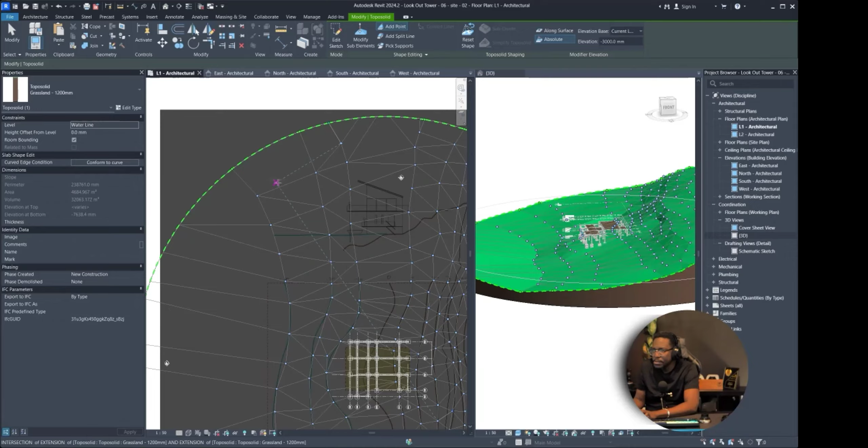Then minus 3,000. Then what we can do is pretty much the rest of the points we can make it flat. So we could actually in the 3D view select these other points, this point here, and we can just make this point be minus 3,000. There we go. So now it goes down and pretty much just levels out.

All right, and there we have it. We now have our terrain. And we can see that we have our land and then we have our building that's now here.

Sir, how can I change the thickness of the terrain? Okay, so look in the edit type settings. Also, sir, what dimensions are used for your footing? It varies. It's totally based on you. Whatever you want to use for your design. Yeah. Okay. But just make it reasonable. You know what I mean? Yeah. Right.

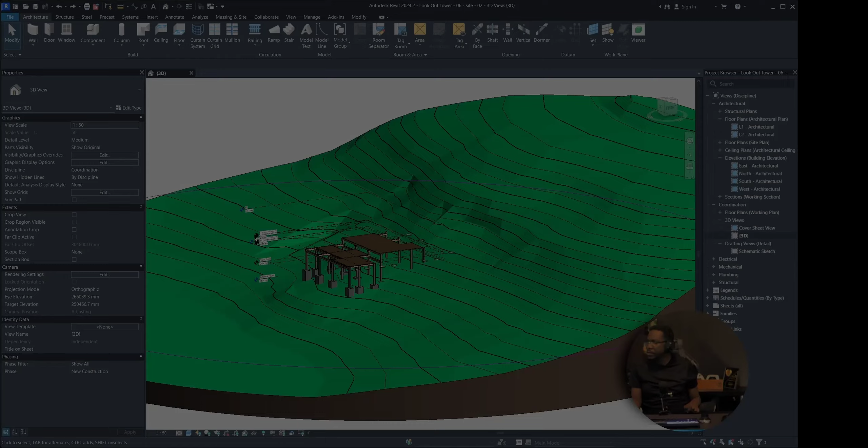We have the site, we do need to add a few more elements. So for reference, we are going to be adding some trees and a water body, right? So we're going to add the water body out here. So first thing, let's add the water body. Now to do that, we can go to our floor plan and we can actually hide this. Let's hide this element.

I don't know what happened, but I can't come out of modify. It says modify / create toposolid boundary. Right. So do you see a checkbox that you tick to confirm what you modified? Yeah, but I'm not finished, and it's not allowing me to do the little pinpoints anymore. Right. So let me see. You are in the tool. So let's say that you are on level 1. And I'm going to go to modify. No, you go to add points. Hold on, are you on add points?

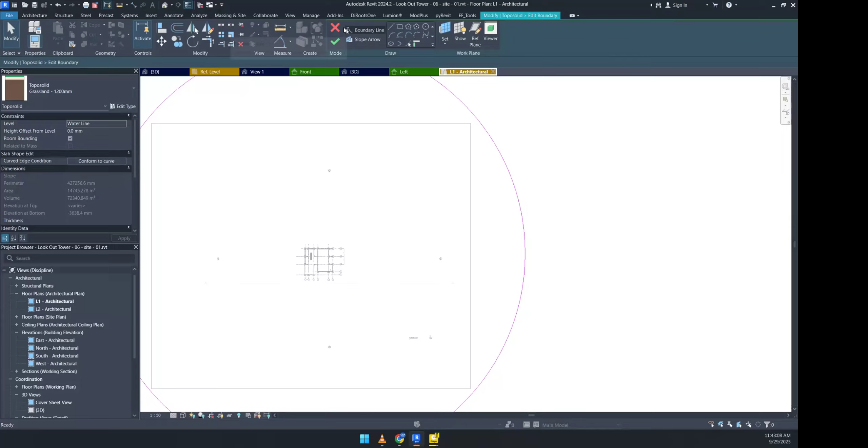Or are you on modify? No, I can't see add points anymore. It says modify, create, toposolid boundary. Oh, hold on. Are you on the edit sketch? I think that's where you are. Yes, I think that's the one I'm on. But I don't want to lose what I've done so far.

In what? In the modifying the height? Yes, in the thing where you put the points. No, you won't lose it because the sketch only changes the shape of the terrain. So if I choose cancel, it will go back to the points that you created. Okay. And then I can get back the point, or I just press add point again. Right. There you go. Okay.

Oh yes. All right. Here, and if you notice, when you look at the site element, you notice that it's cut here, and the reason it's done that is because this is where our cut plane is, right? If we look at the side view, maybe this side would be better, right? You can see that we do have our level, and then we have a cut plane, so it is cutting

the terrain as well. Right now, that doesn't necessarily matter for us, but in terms of doing construction drawings, you would want to adjust your view range so that you're able to see the full terrain for your site plan. For our purposes, we're not going to be creating site plans, but I just mentioned that as FYI information. All right, so let's work on our land now.

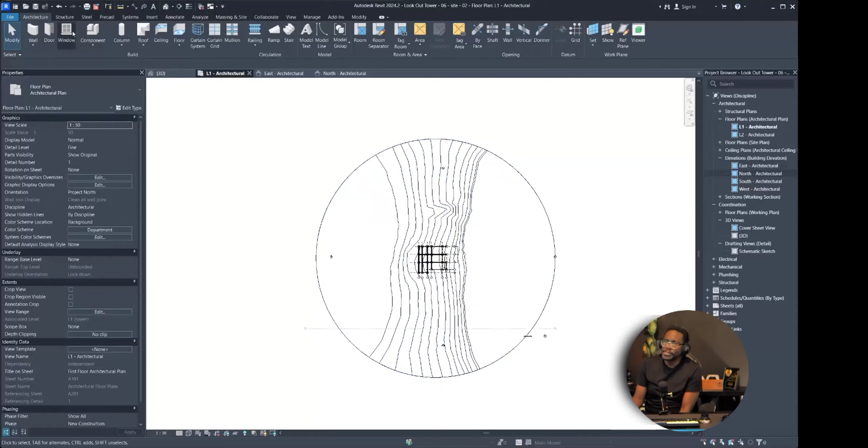So we go to top view, and for the water, I'm thinking that we can also do a curve as well. So we're going to do a custom shape for that. So for that, we're going to go to the model in place. So we're going to choose model in place, and we can model under these categories. I don't think water is a category, so we're just going to choose generic model and choose OK.

And we're going to name this water level. We're going to call this water object or something like that, or water surface. All right. So what is that, a mass? This is going to change. Did you use a mass? Oh no, this is actually model in place. So you go to, wait, where's the ribbon? Hold on. Right. On the component, you click the drop down and you go to model in place.

What did you select when you hit model in place? It's under architecture, component, the down arrow. No, I mean for the parameters. Let me see. When you go model in place. Oh, you mean which one? Yeah. Generic. You can just select a generic model. There, I was looking at the video.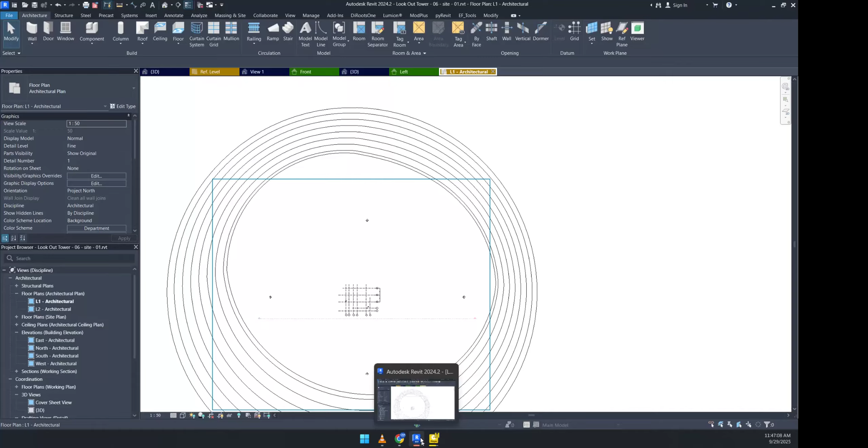But there's no water category, so we're just going to draw the shape of the water and then just change the material, basically. But we're going to draw it in a kind of a curve. So let me show you that. Up here are some modeling tools. For example, we can extrude and do these modeling functions. For what we're going to do, we just need an extrusion. That's pretty straightforward. So we're going to click extrude.

And what I'm suggesting is the water is going to go a bit... Wait, sir, can you go back for just a little bit? Oh, right. I forget. Some of you were asking for 5 minutes, so let me give you 5 minutes. No, sir, I just didn't catch the part where you started the water. So I was just asking.

Right. So you go to architecture. Okay. Then you go to component. But you're going to select the drop down arrow below components. And then you go to model in place. Okay. And then we use the generic category, because it's not furniture and we don't have water.

So whenever you're using model in place, or whenever you have to create a family and it doesn't really have a category, like suppose you want to create a dog. I don't know why you would, but let's say you wanted to create a dog. There's no category for animals, so you probably have to choose generic.

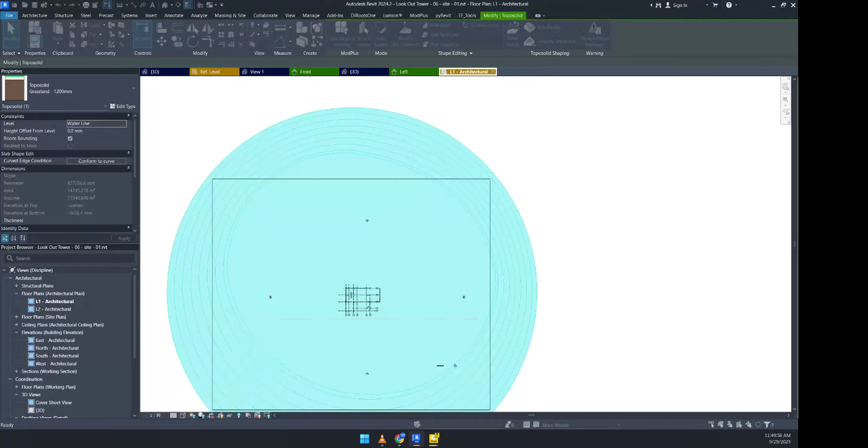Thickness of the terrain. Hold on. So when you click on the terrain and you go to edit type, that dialog box comes up, looks like this. And then you go to structure. That makes you choose the thickness. So you're saying that the thickness goes down to infinity? Infinitely. The thickness of the entire terrain? Yes. Right. So you have to go in here and look.

Maybe you put like 1,000,000 or something for the thickness? No, right now it's just at 500. But 500 what? If it's 500 meters, then yeah, that will take you to infinity. Oh, okay, I found out. I think we're working in different values. Right. I'm working in millimeter. Oh, okay, that's why. Yeah.

All right, let us proceed. Funny enough, when I was building the bench, I was working in Imperial, but in the model, we're working in metric. So yeah, that's a point to note.

But I would want the water to be a little bit wider than the terrain actually. So I'm going to use the circle tool, and I will set the levels after we draw this. Let me go and set my ground plane, and I'm going to set it to be waterline. So now I'm going to draw a circle. Kind of like that. And this circle, I'm going to move it down, maybe about that. So this becomes my water, because this part of the water is going to be pretty much inside the land.

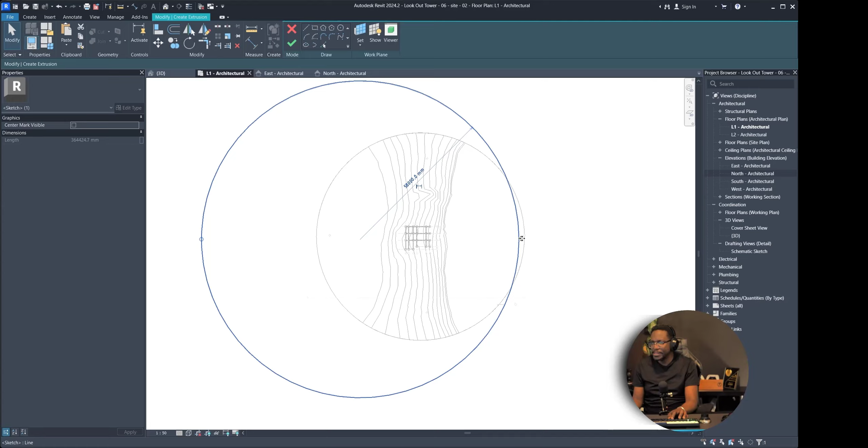So this is fine. In terms of my extruded height, I can click this here. I'm going to choose OK. So it starts here and I want it to go negative. I don't need the top of the water to have a thickness. I just need the water to go to the ground. I could use a 3D view and just adjust the thickness of this to meet the ground like that. So now I have something like this and I'm going to choose OK. All right, so that's great.

Of course, I can select this now and change the material. So I can go where it says generic models. I can go to edit type. So how much do you put for the start and end? For the water? Yeah. What did I put? Like 300 or so? It doesn't really matter, because you're not going to see the edge.

But whenever we're doing the rendering, it just needs to be big enough. You know what I mean? Because you don't want to see the edge of the earth when you're rendering. So no problem.

All right, I'm gonna give everybody a little while. Wait, sir, when we edit type, we're gonna change the water to blue, right? Because right now mine is gray. Yeah. Okay.

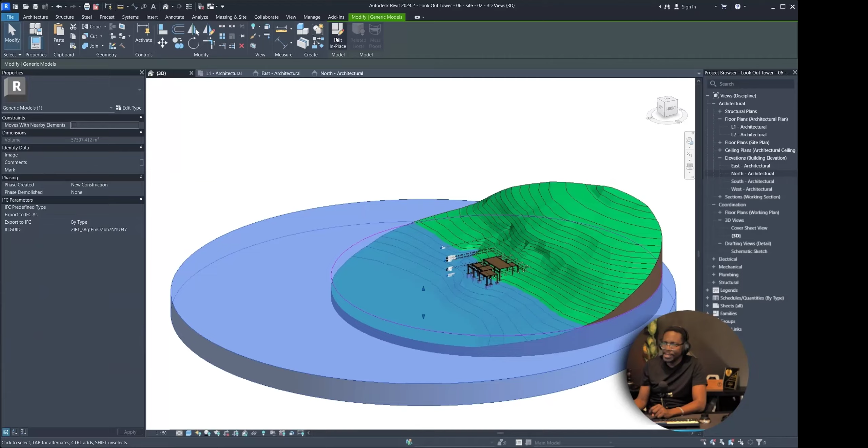Really not here. We have to go into the model that we created. Think of it as kind of like a wrapper, and inside that wrapper is the model we created. So we need to open this wrapper by going to edit in place. It's just telling us that we have some duplicate values, but that's okay. Now we're inside the model.

Inside the model, we can change things like the height and the shape and the material. So make sure we're under modify. We're gonna go here to the materials tab and we're gonna find water. And we're just going to click the surface here, and we could actually click the side as well and the bottom. So this whole thing is just water.

And we choose done, then we choose OK. All right, so now we have the water level, that's there. Now remember, we are going to go ahead and render these views. So we're not going to worry too much about the water material and these things. We just need it to be represented here.

All right, now the next thing we want to do is we need to add maybe some trees. Now to do that, we're going to need to import those families. So we need to go to insert, and then we're going to... doesn't want to change. Mine either. It's still gray. Yeah. It's still gray. All right. So

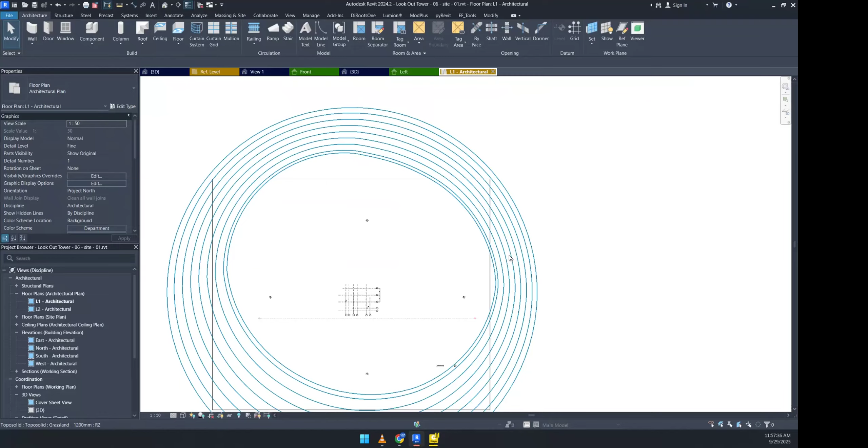Let me see. When you create an object, come on this screen. Let me make sure that you have the materials right. I'm just gonna create a sample really quickly. There we go. Okay. You sure? Okay. So this is what yours looks like.

So let me see. When you change the material here, when you go into the material settings, but I still have, okay, I still have it. So the appearance is here. Okay, sir, I got it. I just have to change the by category. Water. Oh, hold on. Where did you change it by category? Because when you're in the family properties.

Right. So when you click on it here and you go to the material, didn't you go to the material editor and then you choose water here? I actually went to the material editor under the modify tab, where it says paint. That's where I went. Oh, you used paint. All right. I mean, that's cool.

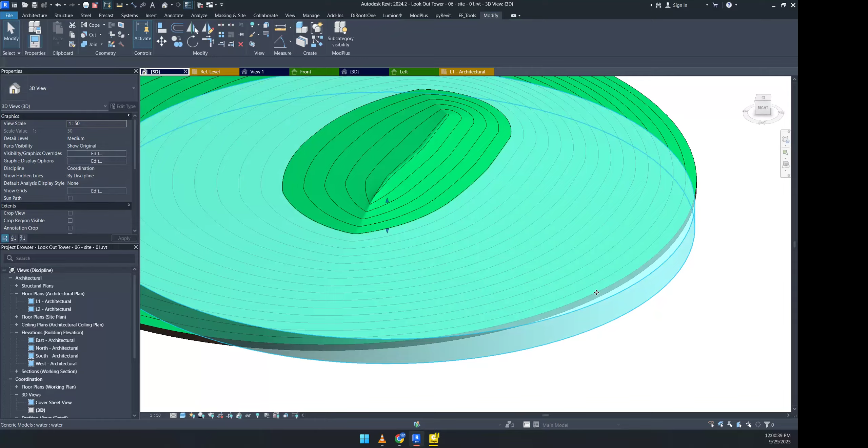So hold on. So when you click on the object, right? In your properties tab, it says materials and it says by category here, right? I'm not seeing materials and finishes. Sir, she probably never pressed edit in place. Okay, I get what you're saying. So when you click it, come on, Revit. When you click it, you have to edit this object. So to do that, you would need to click edit in place here or double click it.

So when you go edit in place now, that's when you can actually change the properties of the object. So think of it like, you remember when we were doing the extrude in the family editor? So for example, when I'm in edit mode, right? I can make another shape here. And let me make another shape here. All right, let me choose OK, and I'm going to choose finish.

Now, when I click on this, all of these shapes highlight. So if I wanted to go inside of this model in place element to change them, I would need to now go to edit in place, and that allows me to now select them independently. And I can do things like change the width or whatever, and change the material. You understand? So you just have to go into model in place in order to change them, and in order to change the material. Yeah, I got it. All right, cool.

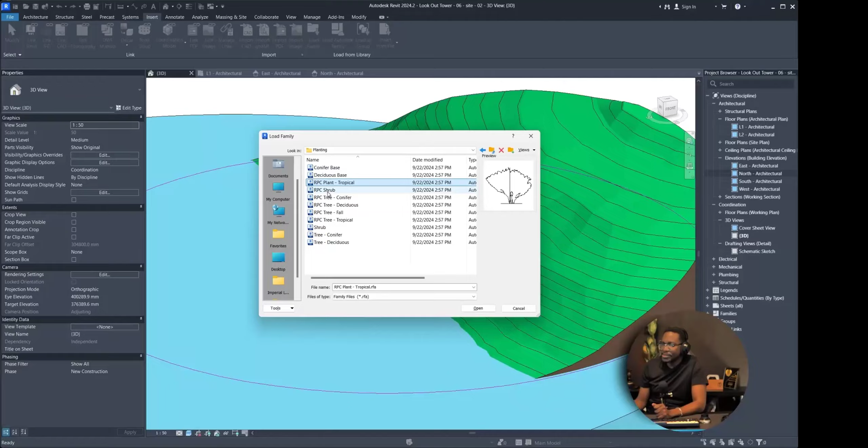Okay. All right, let's proceed to load family. And we are going to look under the same US category, and then we're going to look for site. And under site, we see a few things here. So let's go to, no, actually not site. We're going to look for planting, right? And then these are actually family groups. So we can choose tropical and open that.

Then now when we go to architectural, that comes under the component category. So we can go to add component, and here we go. Now the good thing is that this is 6 feet tall, but if you click this, there are different types of tropical plants. So for example, we have a hurricane palm that's 12, and all you need to do is just stick them randomly.

Let's go with the grass palm. The tallest one is the royal palm, so this one is pretty tall. So we can place these. Wait, sorry, go back outside, please, from when you started the country. Right. So

let me go here. Then now when we go to architectural, that comes under the component category. So we can go to add component. Because remember, you need to load them first. So did you load them? Sir. You said yes? No, I didn't. Okay. So right. So you need to go to load family, and then you look under planting.

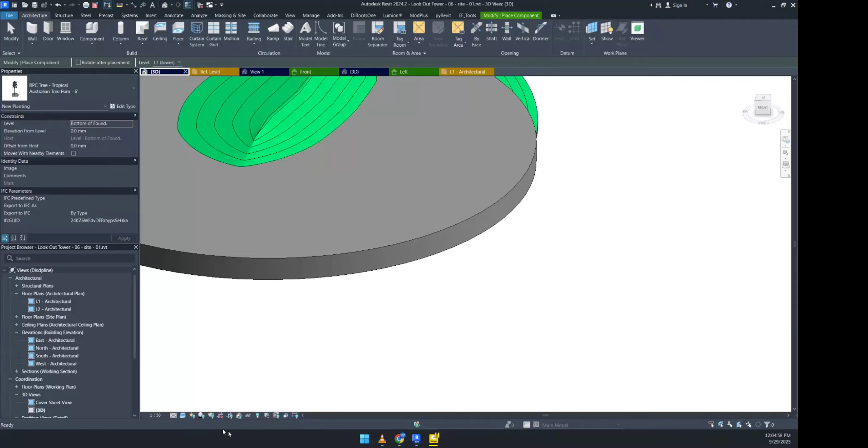Oh, now the good thing is like this is 6 feet tall, but if you click this, there are different types of tropical plants. So for example, we have a hurricane palm that's 12, and all you need to do is just stick them randomly. Let's go with the grass palm. The tallest one is the royal palm, so this one is pretty tall. So we can place these. And then again, guys, this is just representational. So

then what we could do, let's go back to insert and load family. We could load some of these deciduous. Yeah. Now, you might notice that these trees look a little weird because they're like flat, and that's because it's using a type of, let's call it a tree plugin that's called RPC trees. I'm going to just mix it up a little bit, so I'm going to choose this other one

here. And what it is, it looks plain in the viewport, but when it renders, it looks like an actual tree. Now, we're not too much worried about that because we are not going to be rendering in Revit anyway, but we're still going to place these objects, which will make rendering in other programs much easier. All right, so we're going to save this.

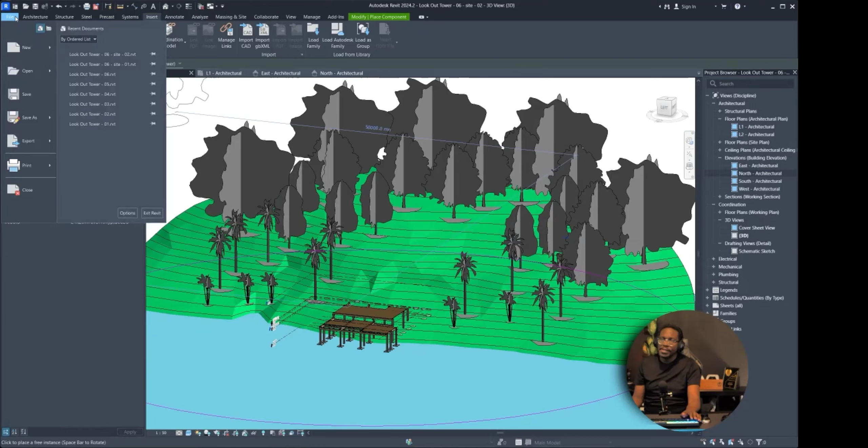And for good measure, we are going to create a new 3D view. We're going to create a camera view that will give us a perspective shot so we can kind of see how everything is looking. So we're going to go to view. And then under 3D view, we're going to go to camera. And how this works is you click and drag and it's going to create a view. So I'm going to drag all the way at that and release. I'm going to set an angle.

Okay, let me press escape. Let me do that again. I want to do it from this side and then click. And then you will notice it generates this 3D view. And I can move around and stuff. So you can see how everything is coming together so far. Okay, so we have created the foundation structure and the terrain, and this is how we are looking currently. Okay, so that is it for terrain.

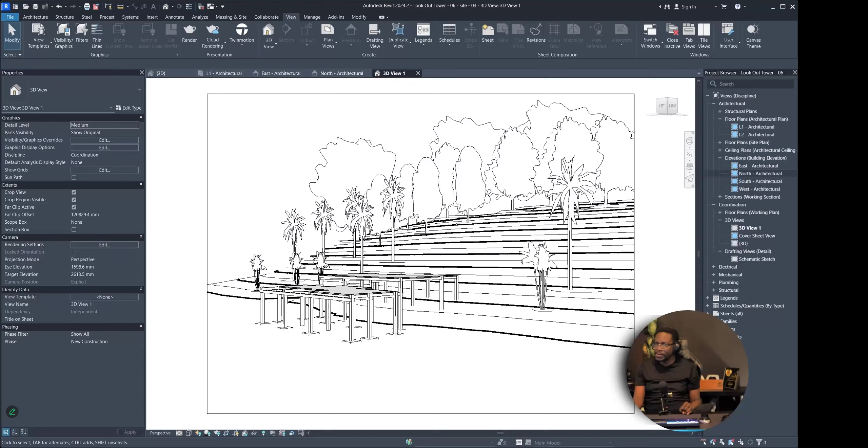If you notice, if you refresh the website, I go here. When you refresh the website, so far we've gone 3 class activities. So I gave you activity 1, which was a checkpoint where you submit your design sketch. If you submit that same day, you get that point. Most people got that.

Then there was an activity 2 where if you submit, what was it? The foundation, right? So last week. So I was like, okay, for those of you that finished the foundation, you submit it to get a point towards a class activity. Sir, I object. I think we should get the point today. That has the terrain and the foundation.

All right, fine. Because I was just about to say, literally only 2 people submitted the foundation that day, right? So I tell you what, I'll give you guys time to redeem yourself, right? So for class activity 2, give me the terrain and the foundation together, and I will record you as participated in class activity 2.

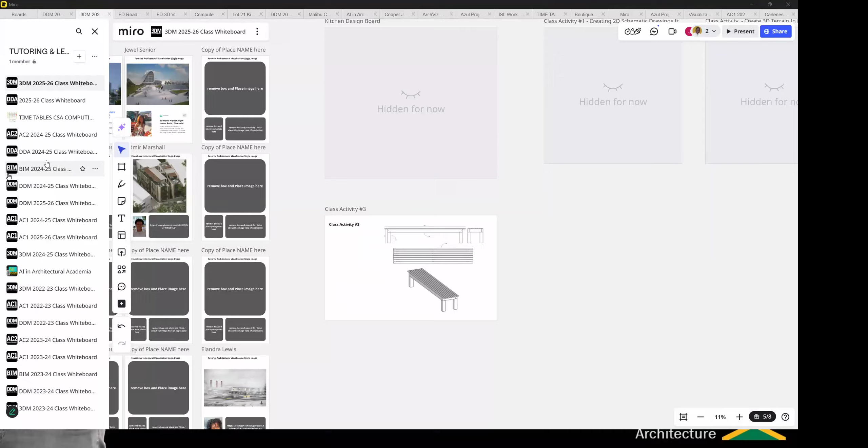All right, everybody else. Oh, and also, sir, I would like to be added to the group. This is my first session because I wasn't sure I needed to commence before completing 2D. Oh, okay. So you're not currently in a group. No, sir. Hold on. Let me get that down. It's the same for me, sir. I'm also not in a group yet. All right, hold on. That is okay. Well, let me do Tariq first. All right, Tariq.

Who hasn't presented yet? So we already revealed 5 and 6 last week, so those are well underway. All right, okay, here. All right, cool. So Tariq, you are going to be in group 9, right? So you're going to look at topic 9. We don't reveal that topic yet. And who else? Daniela Webley. All right, thanks, sir. Okay, so that's it for me then. That is it for you.

So you just need the handout for those presentations, right? I'm not sure, but I'll communicate with a group member. All right, good. Just to point out that many people, when they say Jamaican dialect, they don't understand that a dialect is simply a form of a language. Webley, you're going to be in group 7. Standard British English is a dialect of English. American English is a dialect of English. So you need to look on this to see your group members. Okay, thank you, sir.

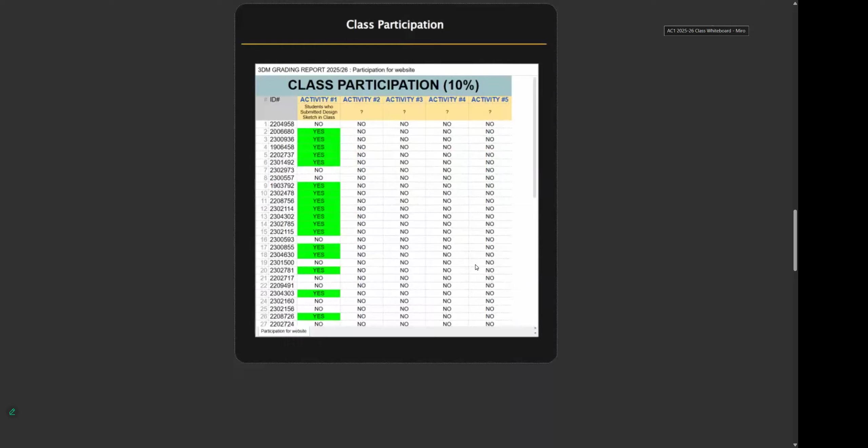Where is this thing? Okay. Some people I don't have the ID number for. Collins, you are here, but you're not in a group. So were you in the class when we were putting people in groups? I don't think I was in that class session. Right, I'm not seeing you. Because, as I said, I started the class late. Okay, all right, cool. I'm gonna put you in group 10. Okay.

So, Collins. All right, I'm gonna update the group list on the website, but you can also see it on the Miro board as well. So any one of those places you can go to, you will see the group list, so you can see who your group members are. Cool. Okay, sir.

Anybody else? Yeah, with class activity number 2. So I'm changing that to today. What we did today, the terrain and the model and the foundation that you did last week, if you submit that to me today, then you will get the point for class activity 2. I submitted the foundation last class. Oh, you already got it. Don't worry about it. So just upload the terrain and the foundation. That checkpoint is officially due on Wednesday, meaning that after Wednesday is a 1% per day reduction, right?